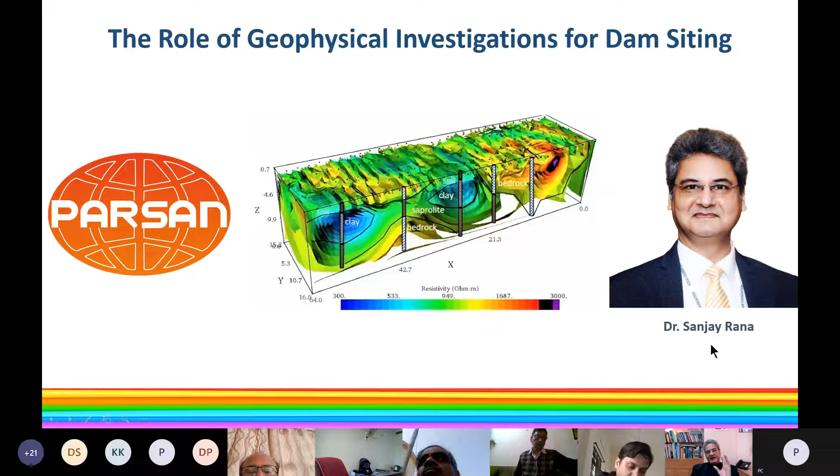As I said, I'll try to finish 15 minutes before the allotted time, so that we have at least 15 minutes for our discussions.

I represent the company PARSAN Overseas Private Limited, which is an ISO company. We are the largest engineering geophysics company in the country. But more than that, we are known for bringing new technologies into the country from time to time, starting from GPR in '96, and then shear wave refraction in '97, and the list goes on. So our emphasis is to bring the latest and cutting edge technology into the country, so that it can be used for various purposes in India.

We are an Indian multinational, so we have offices in India, which is in Delhi, Kolkata, and Bhopal, and we have 2 offices abroad, one in Bahrain and other in Saudi Arabia, and we are working in 18 countries around the world.

Various prestigious projects which we have completed: 76 hydroelectric power project sites were investigated by us from 2001 to 2002, under the 50,000 megawatt project of CEA. Lower Subansiri was done by us, and so many hydropower projects which we have done over the period of time. I have already been introduced very liberally, so I'll not go into my introduction anymore.

Except for the fact that some time back, I also came up with a guideline on geophysical investigation of dams, which was actually dealing with how existing dams should be investigated, other than dam siting. But this particular presentation, I'm going to keep to dam siting only. Geophysics is used extensively also for investigating existing dams, but that, of course, is a topic for some other presentation.

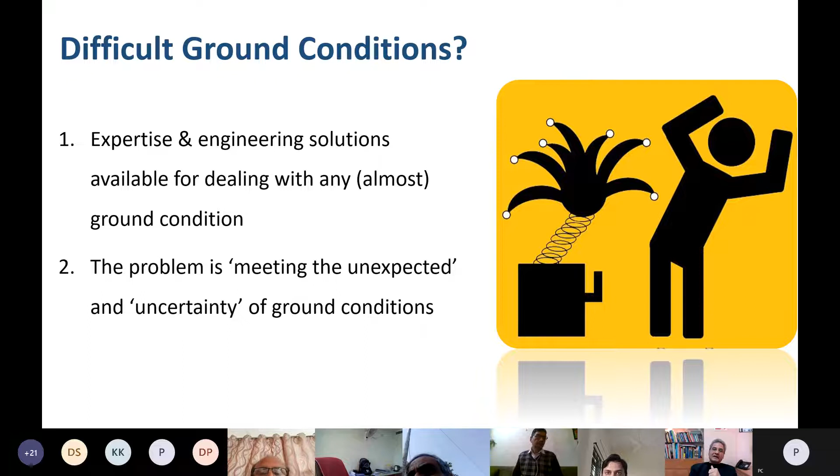For example, there is a shear zone, a fracture zone, a weak ground. There are so many ground improvement techniques which can be applied to take care of such issues. The problem is meeting the unexpected, that is, we don't know what exactly we might come across as we go through our construction process, and that's where the problem is. So meeting the unexpected and uncertainty of ground condition is the problem, and that's where geophysical investigation comes into the picture.

So what is geophysics? Just for people who have not come across geophysics, I'd like to start with this particular slide. This is common to practically all the presentations I make in this field for non-geophysicists, because it's the quickest and fastest way to explain what we are doing.

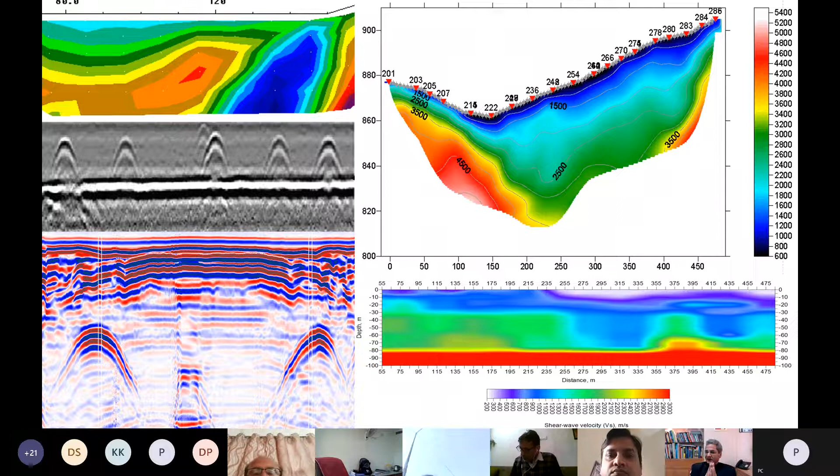Now, these are images of existing dams. As I said, we can use these methods for existing dams also. For example, this is a concrete dam, and here seismic tomography has been done to find fracture zones between the downstream and upstream wall. This is a masonry dam, very much from India. I don't name the dams, but again, upstream and downstream side, this section has been done, and we've been able to find out where exactly the bad zone is.

This is a velocity scale. You can see the velocity in this area is much lower than in the remaining area of the dam. Similarly, this is another dam, a complete L section, around 470 meters long. This has been done from the dam top to the dam gallery. Once we do it, we know exactly where the bad zones are. These green ones are the low velocity zones, so these are the bad zones.

This entire investigation took 2 days of time. This one takes around half a day. So this is the speed, because again, it's like X-ray, it's like MRI - fast, quick, and non-invasive.

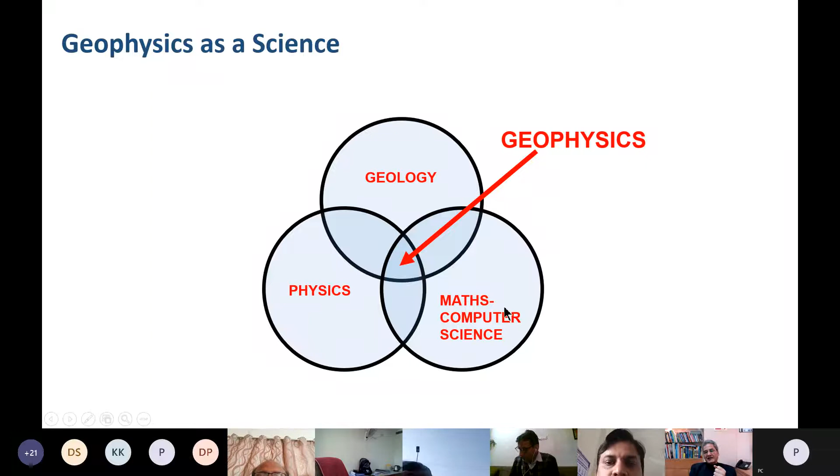Geophysics as a science falls at the intersection of geology, physics, and maths or computer science. So this is where geophysics falls.

Why use geophysics? The simple answer, again coming from the medical imaging example, is why go for X-ray, ultrasound, and MRI? Why not directly go to a doctor and ask him to cut open your body to check where the problem is? Because you don't want destructive investigations unless you know exactly where they should be done. So low cost, just like an X-ray is much cheaper than surgery, geophysical investigations are much cheaper than other investigations. Rapid coverage - with airborne geophysics, you can actually cover thousands of kilometers in a single day.

Use of geophysics does not mean that you do not use boreholes or logging of your holes. Boreholes are important to determine certain properties which only can come from laboratory investigations. But the idea is optimization of holes. So if you do a good geophysical campaign, instead of doing 100 holes, you can end up doing maybe 5 or 7, and still your information can be multiplied by 100. That is the whole idea, because it gives continuous information, minimizes surprises, and is good for early stage application, better planning, and smooth execution.

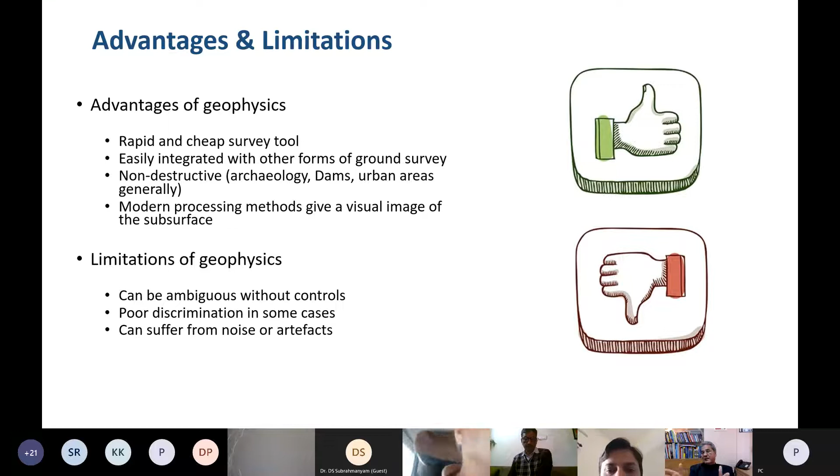There are limitations, of course. It can be ambiguous without controls. For example, if you are just doing one geophysical method and trying to interpret everything out of it, there can be ambiguity, there can be non-uniqueness. In few cases, resolution can be poor, discrimination can be poor, and there can be noise, there can be artifacts. That's where the experience of the practitioner comes into picture. The design of the survey comes into picture, so that you are not depending only on one method, but having a couple of methods in your toolkit to achieve what you want.

Various methods are there: seismic methods which measure elastic wave velocity, GPR which measures EM pulse velocity, electromagnetic and DC resistivity measuring resistivity, EM conductivity measuring electrical AC conductivity, magnetic method measuring the magnetic field strength created by subsurface anomalies, and gravity method measuring gravity field strength which is directly related to the density of the material. So depending on what exactly is your objective, a method has to be chosen.

Choice of the method is so critical that a wrongly designed geophysical program can result in complete failure, and that has happened in many projects. Over my last 32 years of practice, I have come across various clients talking about how they got some investigation done but did not get the desired results. More often than not, it boils down to 90% wrong choice of method, and the remaining 10% is about the inefficiency of the geophysicist doing the job, but mostly it is about the wrong choice of method.

Return on investment is very high on geophysics because it gives you detailed investigation of sites, saving huge costs towards change plans and project delays when surprises crop up. No drilling, no digging, so vast information at a fraction of the cost of traditional methods, and it is an early stage application.

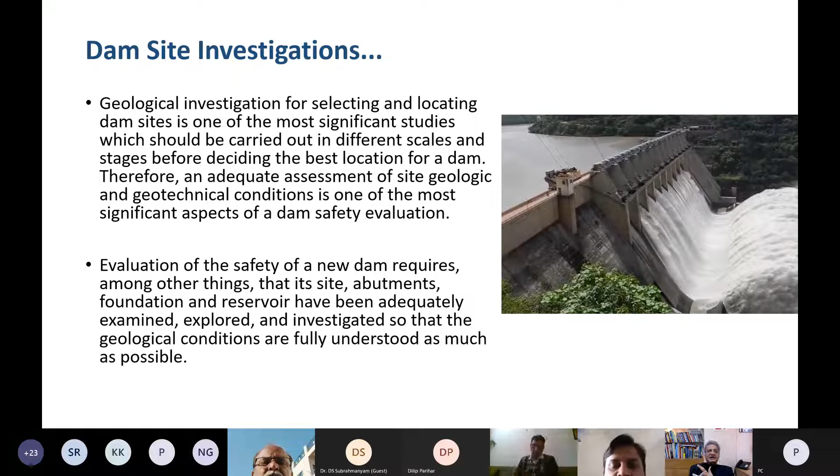So the first objective is the geology of the dam site, including the foundation for the dam itself and the sites for other structures such as spillway, diversion tunnels, and outlet works. Geology of all these components is very, very important to study, to check whether the dam foundation has sufficient strength and durability to support the type of dam proposed, and whether the foundation is watertight, especially when calcified rocks occur at the site and in deeper horizons below the foundations.

Second objective: the geology of the area to be occupied by the reservoir once the dam is completed. Whether the storage area is watertight, or whether there are areas of cavernous limestone or gypsum which might lead to the dam not retaining water. There are many projects where a dam has been constructed, but at the end of it the dam doesn't retain any water, because the reservoir area is not watertight — it is allowing the water to seep through.

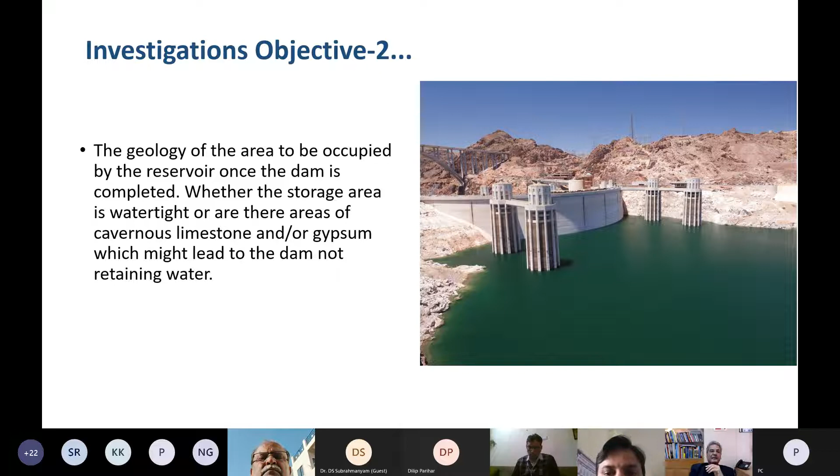Then, stability of the slopes of the dam site, the third objective. So stability of the slopes in the dam site and reservoir area, whether landslides into the reservoirs are possible, which might cause a wave of water to be pushed over the top of the dam. There have been many dam failures where a huge landslide has basically created a wave which has overtopped the dam. So these kinds of slope stability studies are important.

Then, finding the source of construction material needed to build a dam in areas nearby the dam site, including all required types like aggregates of different types and sizes, and filling material in the core and both surfaces. So finding the construction material is another objective, which again can be fulfilled by geophysical investigation.

So all these objectives I have talked about — if we start with good planning and do good geophysical investigations, followed by optimized drilling, you can cut hugely on the amount of time and money spent on investigation, and improve hugely on the amount of information you're obtaining out of it.

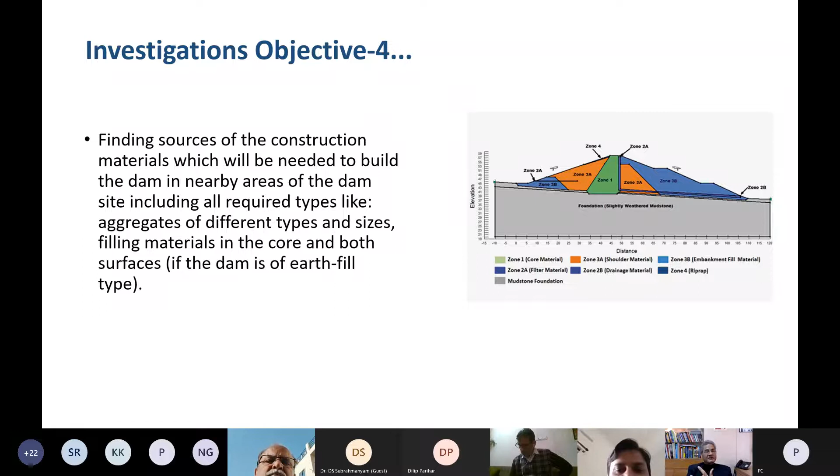So, necessary investigation steps, from beginning to end: study available geological maps, geological mapping, geophysical investigations, drilling, ideally with geophysical logging, then slope stability analysis, hydrogeological studies, seismicity studies, and borrow area studies. So these are all part of investigations for a new dam site.

When we talk about geophysical investigations, there are different types of geophysical studies which should be performed at the dam site and reservoir area to indicate the groundwater level, mechanical properties of the rocks, and the depth of the weathering zone; to detect faults, fractures, shear zones, weak zones in areas of interest; to investigate borrow areas; to conduct slope stability studies; and to determine shear wave velocity for seismic hazard studies. All these geophysics studies should be carried out on a new dam site.

Today in this presentation, I'm going to cover a few of these methods, maybe two or three. It's a very detailed subject. The idea is just to leave the message here that when you are starting study of a new site, to be used for something as important as a dam, it is good to be thorough. And when you want to be thorough, it has to start in a sequence.

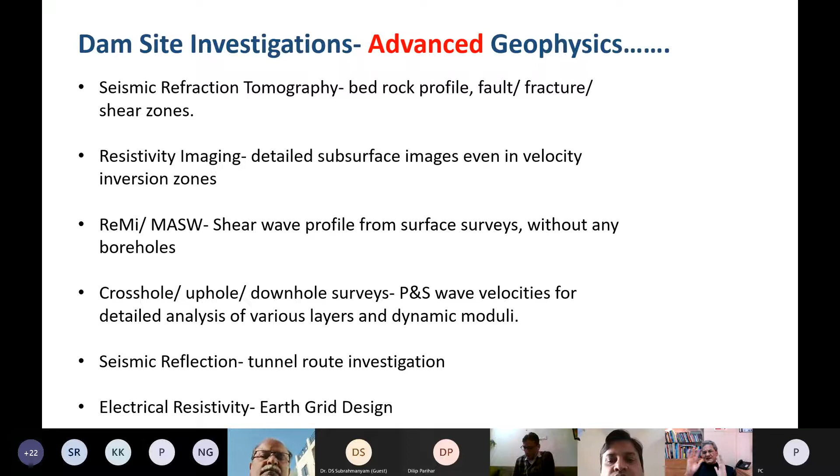Seismic reflection — if you're taking a tunnel, for example, for tunnel route investigation, seismic reflection is very useful. And for powerhouse areas, electrical resistivity helps in earth grid design. So these are various methods which are useful for dam site investigation.

I'll start with seismic refraction tomography. This is one of the most used methods for most site investigations. I still always maintain that you should, without fail, add another method along with this. Never use any method in isolation — that's the message I always try to give to dam owners. And there are big examples from around the world.

I will not name any dam, but one particular site in Bhutan had a seismic refraction study done by a company from Japan — experienced guys. They did seismic refraction, and based on the P wave velocities they gave the depth of bedrock. Drilling was also done, samples were taken, bedrock was confirmed, and excavation started. At that time it was realized that where they had reported bedrock at, say, 40 meters, bedrock was not even encountered up to 70 meters. The thick boulder layer was misinterpreted as rock based on P wave velocity. That is the danger of using a single method.

At the same site, if you also use refraction microtremor or anything which gives you shear wave velocity, you would have easily differentiated between the boulder layer and the rock. That's why, as I'm showing seismic refraction tomography, I'm also telling you the limitations of using a single method. But otherwise, it's a very strong method which is used frequently for dam investigation.

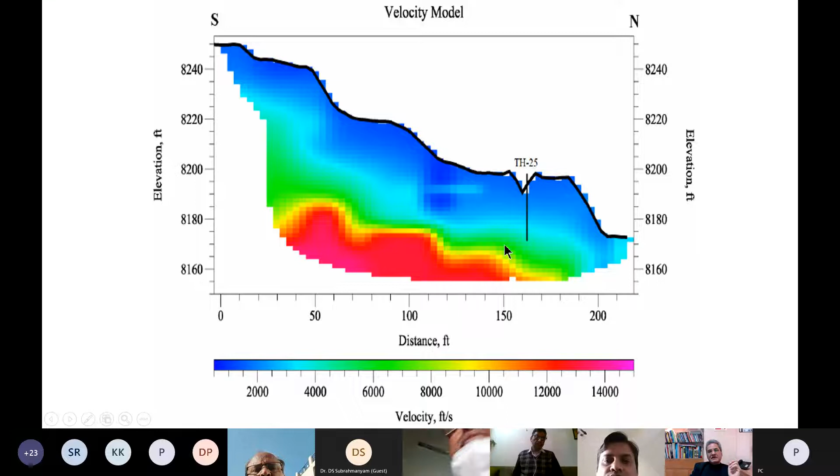These are various examples where borehole correlation has also been done. So this is overburden, you can see this is weathered rock, and this is the rock profile here.

Various such examples. What has changed over the years is that earlier we were doing seismic refraction presenting layer-based models - layer 1, layer 2, layer 3 - assuming that seismic velocity within a layer remains constant. That's not geologically true; the seismic velocity changes even within a layer. Seismic tomography has given us much better control over the way we look at the results, and we're able to interpret them better.

So this, for example, is the result of a typical layer-based model, showing bedrock here, but now you see the rock actually going down like this. So you're able to see with much more clarity how the rock is changing - this is distance and depth.

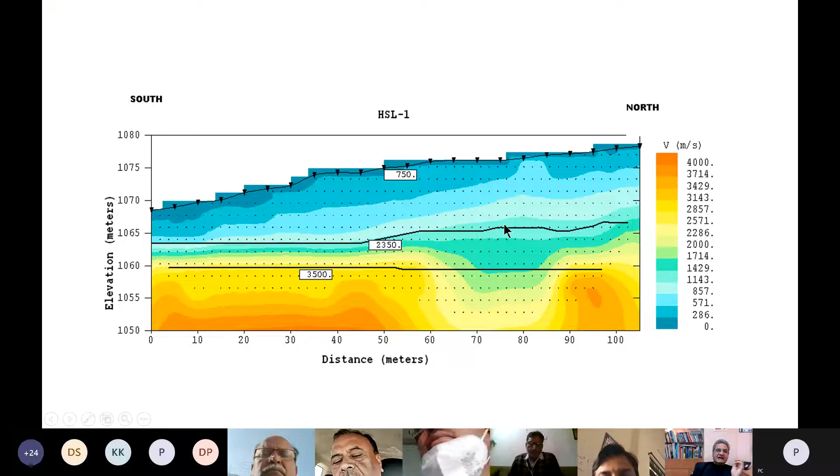This is a 105 meter long profile, and the time it takes to do this profile is around 1.5 hours. The time it takes to process this data is another 2 to 3 hours. So that is the speed of investigation, and this is the continuity of information - practically every inch has information available.

Now look at this example - there is a small shear zone here, hardly 7 to 10 meters. What are the chances that you're actually going to detect this shear zone through a normal drilling campaign?

1 in 1,000 or 1 in a million maybe. Once you do a geophysical investigation, you're able to see that okay, this is my rock, but this is where a shear zone is there, and now you can cater for it in your design. You can look for ways not to get affected by it when you actually start your construction.

This is the interpretation. So once you have done the entire thing, you can see weathered bedrock. This is how the weathered bedrock is, this is the overburden, and this is your very hard bedrock. And here you can see the topography of the entire thing is clear.

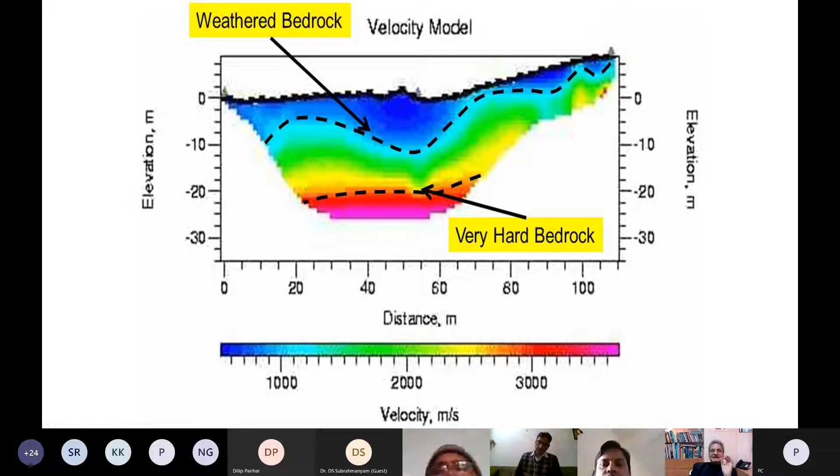It's not that you do a drill hole here and a drill hole here and then connect it like this. That kind of interpolation or extrapolation always leads to error. What you need in such sensitive areas is continuous information. So you get this kind of continuous information, and that's the beauty of these methods.

So what you get by seismic refraction is bedrock profile, rock quality and depth, thickness of overburden, fractures and weak zones, and it's used for slope stability studies also. So this is one of the methods which is very, very potent to investigate your dam sites.

Next method is electrical resistivity imaging. We also call it electrical resistivity tomography. Tomo is a slice, graphy is to write, so tomography is to write a slice. Whenever we are writing a slice of the earth, we call it tomography. So this is electrical resistivity imaging or electrical resistivity tomography.

Here what we do is based on a very old method of resistivity. Resistivity method says that if you pump current using two electrodes and measure potential using two other electrodes, then by Ohm's law you can find the resistance. You are able to find out the resistance R equals V upon I. V equals IR, that's Ohm's law. Now the same concept of the resistivity survey has been used in resistivity imaging, where we

put a number of electrodes together. So these days, for example, I have the system. I started using the 48 electrode system. I actually made my own at one time from my seismic refraction cable. At that time electrical resistivity imaging systems were not commercially available, so I created my own with a switch box and all that. That's long back in '96.

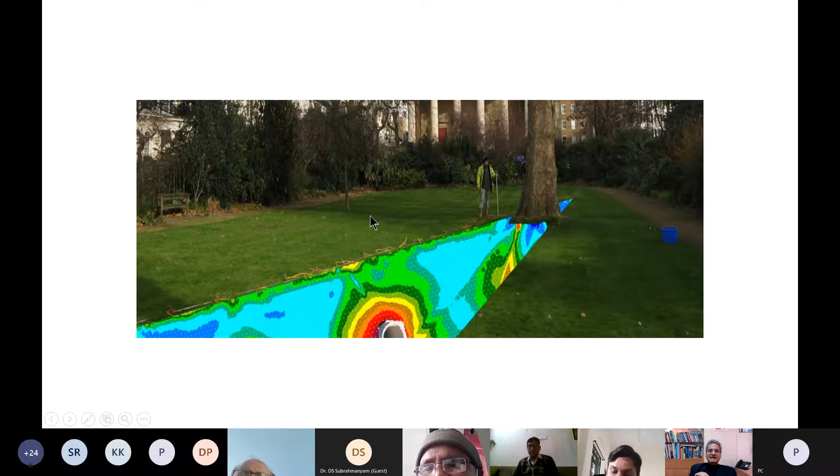Okay, so once you do this, for example, this is a rock. Again, the rock has very, very high resistivity, so you will see high resistivity. Here are the tree roots, so you have low resistivity. Like this, you have a 2D resistivity section of the subsurface. This is how you put it. All these electrodes in the ground are connected by a multi-core cable, and this is the kind of image ultimately which you get.

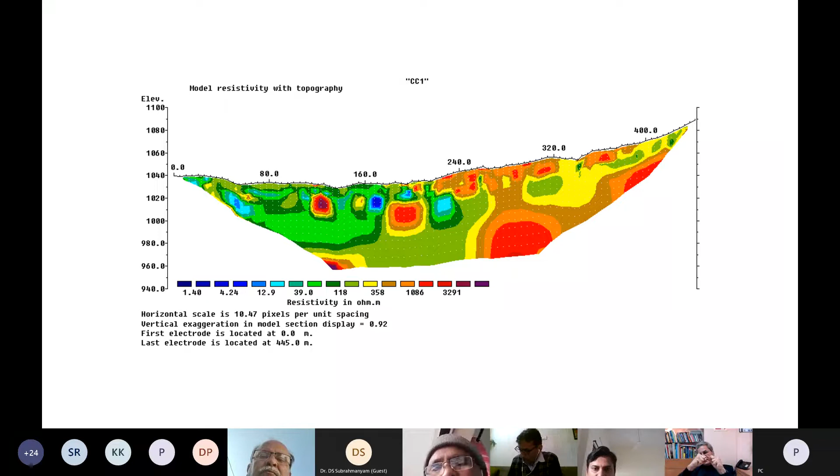This is another example from Lahaul Spiti Valley, where we did not have, by that time, these kind of resistivity meters with 120 electrodes and all that. The client wanted information up to around 500 meters deep. We made our own system of deriving information up to 450 meters.

They had done a number of drillings in this area. They were still not sure of the topography of bedrock, because as you can see, it is changing very quickly from one place to the other. So we did this investigation up to almost a depth of 400 to 500 meters.

Now this is a wonderful example. This again comes from a project we did in Himachal, or it was in Lahaul Spiti Valley, I forget. It's a very old project. Seismic refraction was done here, and as you can see, this is all bedrock.

Seismic refraction works on the principle of Snell's law: sin I upon sin R equals V1 upon V2. If V2 is greater than V1, then R is greater than I, and critical refraction can only happen when the velocity of the lower layer is higher than the velocity of the upper layer. If a low velocity zone is under a high velocity zone, seismic refraction will not detect it.

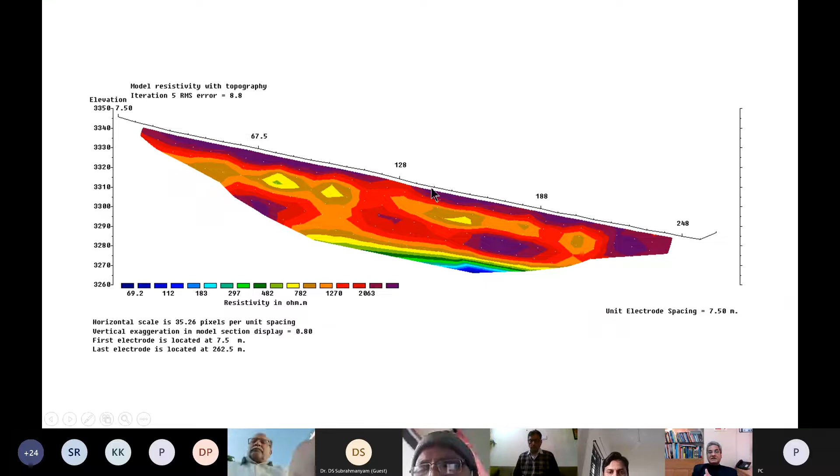That is why I said we always advocate combining methods. So in this case also, the methods were combined. We did refraction and we also did ERI. In the ERI data, a zone under the rock, possibly due to tectonic activity or folding, was detected using electrical resistivity imaging. This is a very strong case for why methods should be combined to do a thorough investigation.

It is also used for tunnel route studies. So this is a tunnel route, and here is a low resistivity zone, which was further investigated by drilling. This is basically a fracture, a fault zone. Here again, the weak zone is located here.

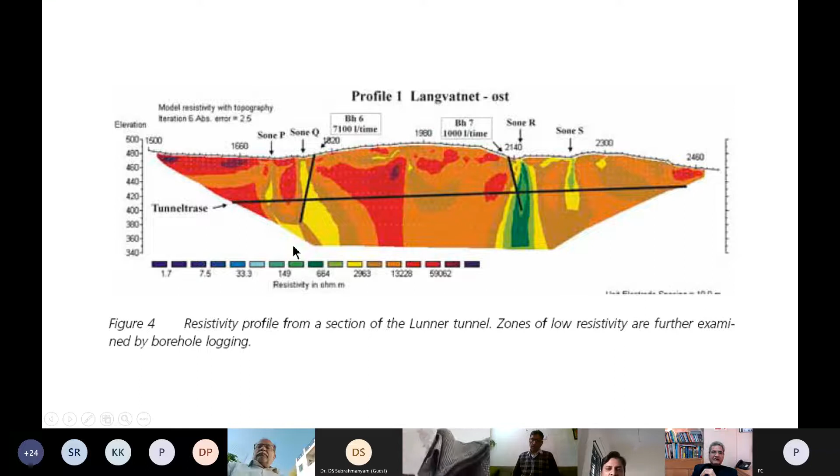The best part is that we have now mastered doing all these methods across flowing rivers. So when you are finalizing your dam axis, it is always a good idea to do a good geophysical investigation.

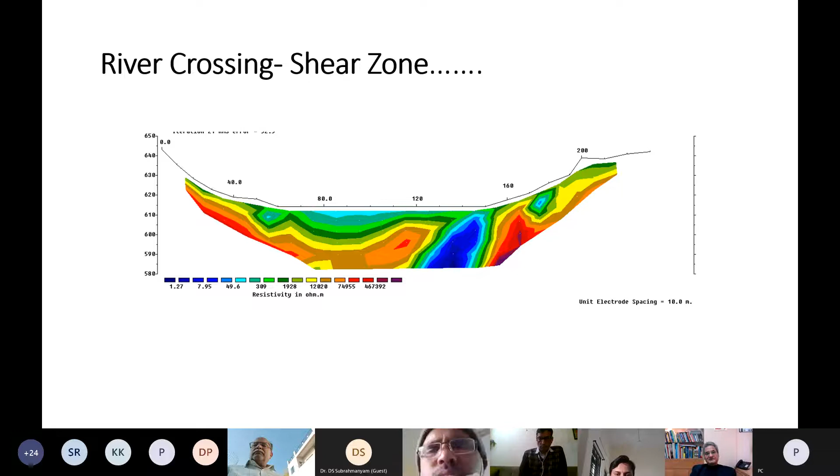All right, so these are various examples I wanted to show you. The next method I'm going to talk about is ReMi refraction microtremor, or MASW.

In many cases, we want to find out the shear wave velocity. Those involved in design already know that for earthquake hazard response, vibration response, or liquefaction analysis, you need shear wave velocity. REMI or MASW gives a very quick way of finding it out, based on dispersion of Rayleigh waves, and once you do this, you are able to see very clearly.

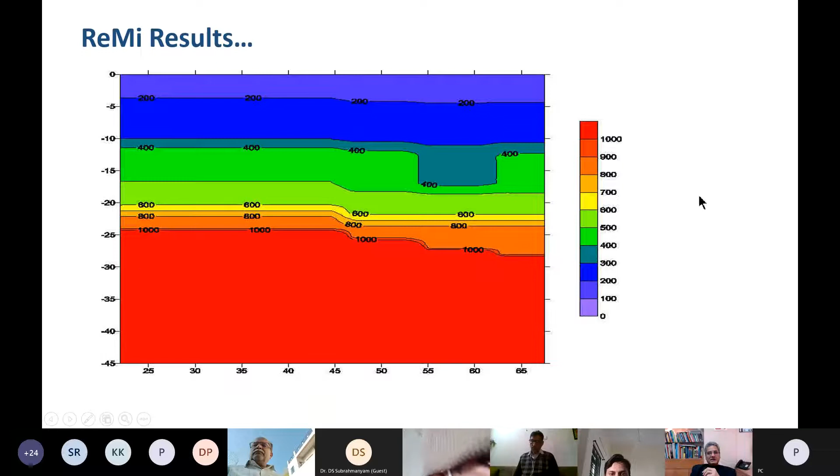This is another example of REMI, where this is only 45 meters, but you're able to see various blocks of anomalies. Now, this is a combination with a GPR profile. GPR is another method I'm not covering in this presentation because it becomes too lengthy with too many methods, but GPR works on the principle of EM reflection. So for high resolution shallow studies, GPR is the method to go for.

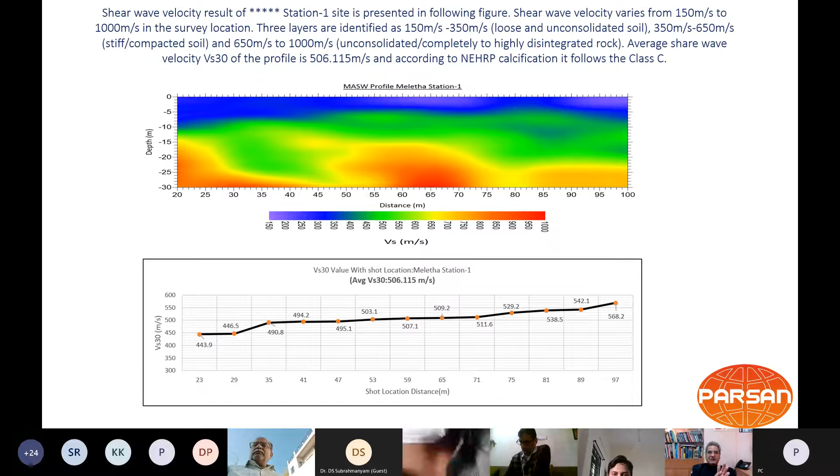Again here, the example of MASW, for these 30 meters. If you are going up to 30, 35, 40 meters, MASW is something we use. When we go more than 30, 40 meters, we have to go for passive source, so either you can use passive MASW or REMI, refraction microtremor.

The next method I'm going to talk about quickly is seismic tomography, again a very interesting method. Once you want to investigate a subsurface in great detail, you can have two boreholes, and in between the two boreholes you can conduct seismic tomography. In this, we are sending rays from one to the other, and the crisscrossing of these ray paths is being done.

Once we do the inversion of this entire thing, we are able to find out in great detail what is happening between the two boreholes. No interpolation is required. You know exactly what is happening between the two boreholes.

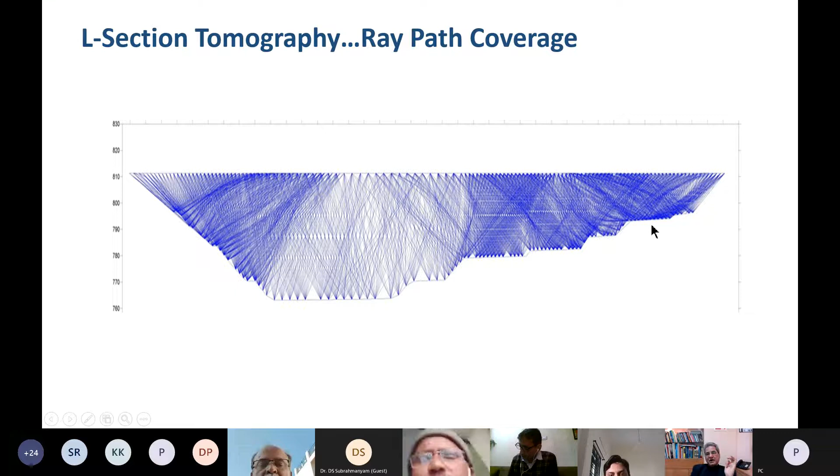This is an example of an existing dam. This is the L section, so dam top, and this is the gallery. Once you do the inversion, you see what's happening between the two faces. This is the example I had shown earlier, so you know exactly where your weak zones are. Again, dam upstream and downstream, with crisscrossing of the ray paths. Once you do the inversion, you know exactly where the bad zone is.

So now, once you're going for treatment, you don't need to plan from top to bottom. You know exactly where the bad zone is, so you can only treat that.

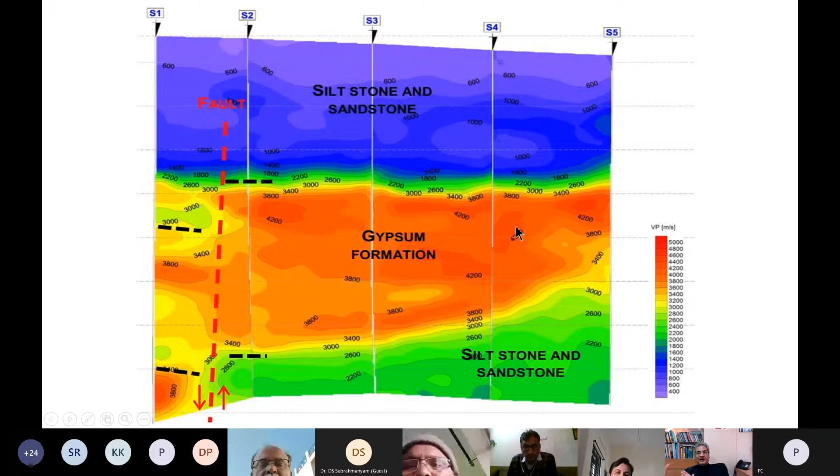If you do it for a new site investigation, for example with boreholes S1, S2, S3, S4, S5, tomography has been done between the boreholes. Now you are able to find exactly how different formations are going from one place to the other, and more importantly, detect features like this fault. This fault will not be detected just by drilling, but once you do tomography, you are able to detect it. So if you are having a drilling campaign, include seismic tomography in the drilling campaign and you can get much better results. With various boreholes, seismic tomography now gives you a continuous picture.

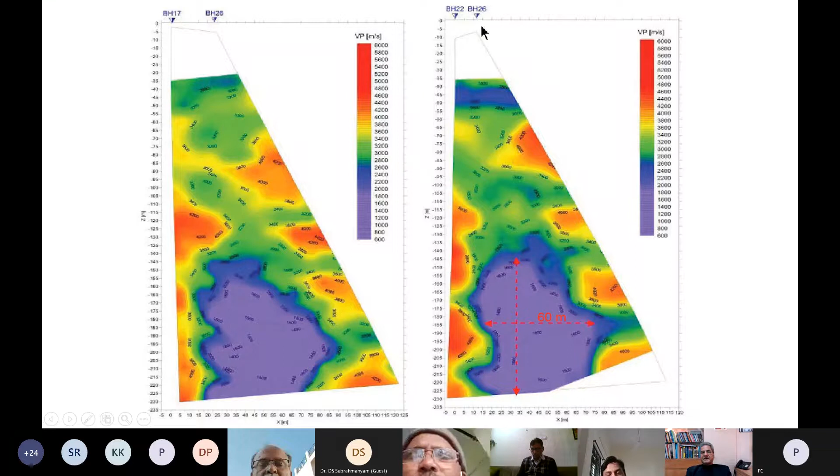No interpolation is required. These are examples of cavity detection using tomography, on 250 meter deep boreholes, where cavities were detected. Distance between boreholes here was as high as 110 meters, and this cavity was as high as 85 by 60 meters. These were inclined boreholes because the platform available for drilling was very small, and this cavity was mapped using seismic tomography.

There are various other applicable methods like seismic reflection, GPR, gravity and microgravity. I'm not able to cover these methods now, but the message is that various methods exist to give you insight into the subsurface.

To conclude with where I started, why use geophysics? Low cost, rapid coverage, continuous information, optimization of drill holes, minimization of surprises, and it's always good for early stage application for better planning and smooth execution.

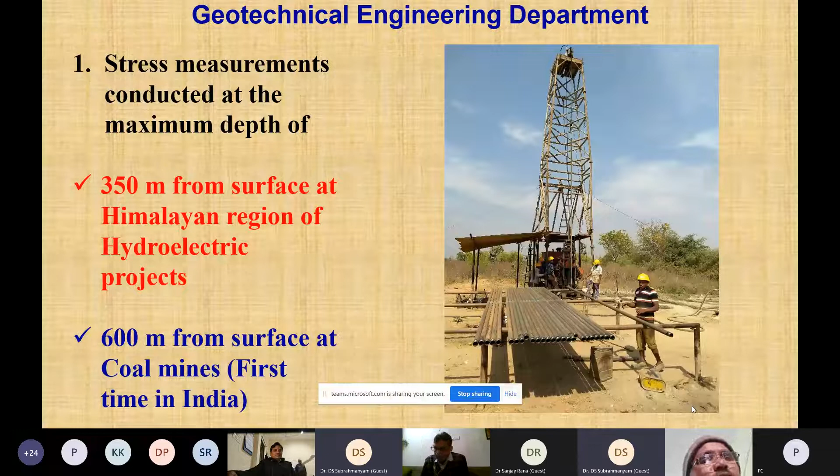Now my topic is state of ground stress, its use and measurement in rock engineering. So I'm going to talk first about in situ stress. What is in situ stress? Why is it called stress? Actually, there are 2 types of stresses in nature: one is physical stress and another is mental stress.

Physical stress is applicable for movable and immovable things, living and non-living things, but mental stress is applicable only to human beings. These 2 stresses have to be released as much as possible; otherwise, there will be instability.

As far as physical stress is concerned, Earth itself is having some stress. Consequently, all naturally formed formations like mountains, landscapes, and everything have some stress. Since we are mainly concerned with rock masses in the present context, stress may be defined, in general, as force per unit area.

Rock masses are initially stressed in their natural state. Whether one is interested in the formation of geological structures like folds, faults, or intrusions, or the stability of artificial structures like tunnels, caverns, etc., stress is the most important factor.

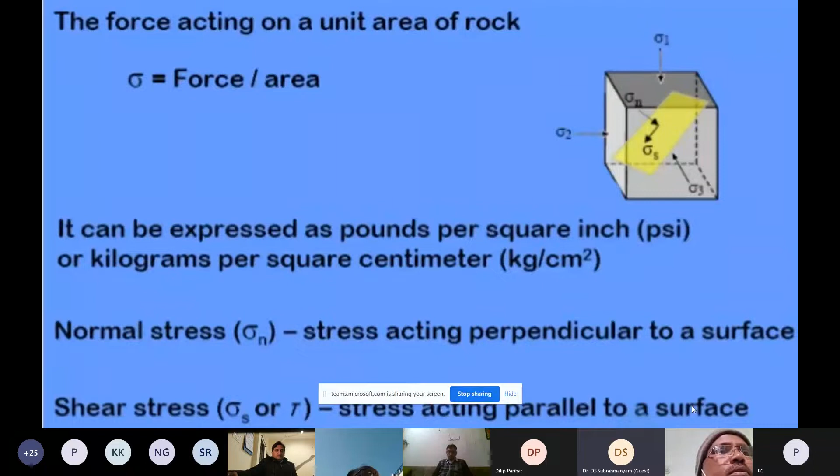Normal stress is stress acting perpendicular to the surface, and shear stress acts parallel to the surface. Actually, what is the origin of the stress?

If we go into the history, previously people used to think that the weight of the overlying rock mass was recognized, for more than a century, as the primary source of stress around underground openings. He postulated what is called hydrostatic stress, meaning like water, which has uniform stress in all directions. This is called hydrostatic stress, similar to the stress state in liquids.

This theory was later modified by him into the lithostatic stress field theory, which assumes the rocks in the crust are in an isotropic state, meaning sigma maximum principal stress, minimum principal stress, and vertical stress are all the same and equal. For many years, the design of underground excavations was based predominantly on this concept.

But the lithostatic stress field theory was later replaced by the uniaxial strain model by Terzaghi.

This is in the year 1952, I think. This concept suggests that because rocks are confined at depth, the horizontal expansion is restricted by adjacent rocks, so that ideally the principal strains become zero, thus making the horizontal stress a function of the weight of the overburden and the Poisson's ratio.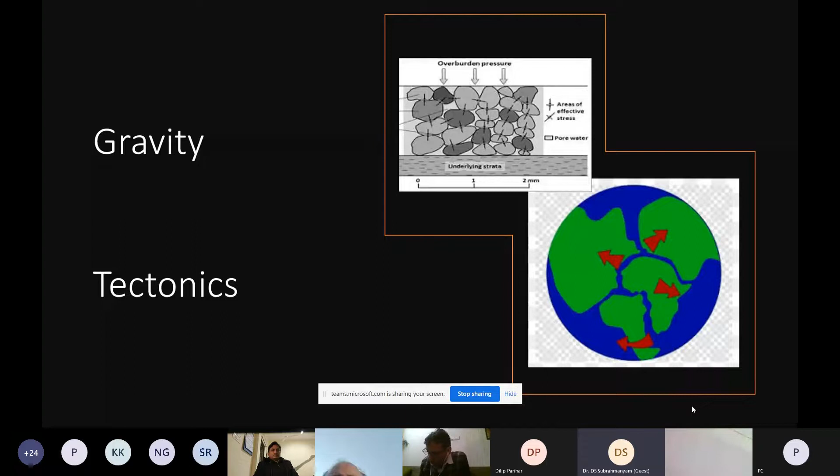So this is explained: whatever the case, there are two main factors for the formation of stress in the universe. Number one is gravity, and the other is tectonics. Gravity is nothing but vertical stress. Tectonics is always related to horizontal stress movements. These are the main important factors for the formation of stress in this universe.

So stress is fundamental to the principles and applications of rock mechanics. It is a tensor, a quantity with magnitude, direction, and the plane under consideration. An example of a tensor is stress. It is defined at a point and represented by a second order Cartesian tensor with 6 components.

And it is called continuum mechanics, where each and every particle in the body is continually distributed, not like discrete particles. It is a fictitious quantity that cannot be measured directly, so if you want to measure the stress, you have to disturb the rock. Otherwise, you can't measure it.

So the total stress field acting in a rock can be represented by 3 components, S1, S2, S3, or sigma capital H, sigma small h, or sigma v, at right angles to each other. It is common practice to consider that the ratio of the average horizontal stress to the vertical stress is denoted by K. K is the horizontal stress by vertical stress.

Based on K, many design parameters are formulated, and for cavern design and others, K is the most important factor. This vertical stress, maximum principal horizontal, vertical stress is always calculated.

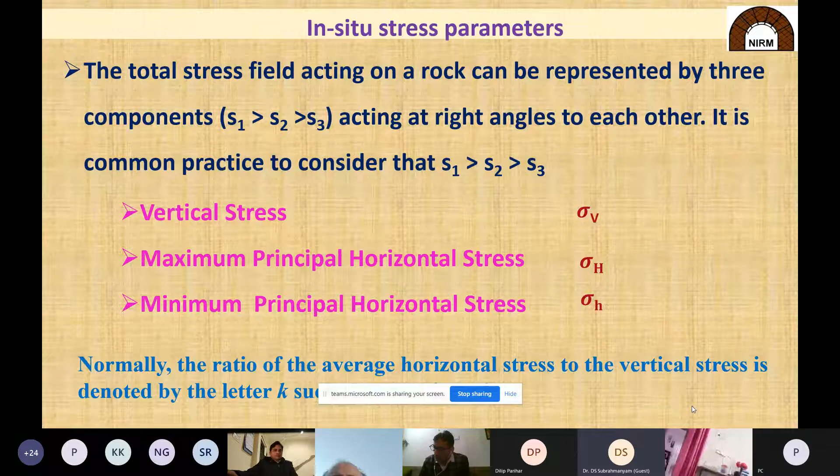In some cases, it is measured directly in some of the methods, which I will explain in later slides. Otherwise, vertical stress can be calculated as rho gh, density and rock cover and acceleration due to gravity. And maximum principal horizontal stress should be measured, and minimum principal horizontal stress also should be measured.

But if you want to have the stress data locally, that means to design any hydraulic project, powerhouse, or any cavern or structure, then you should not depend upon the focal mechanism data, and you have to concentrate on the local stress. That means in situ, directly you have to go to the field and measure the in situ stress.

So on a real or imaginary plane through a material, there can be normal forces and shear forces. These forces create the stress tensor. The normal and shear stress components are the normal and shear forces per unit area.

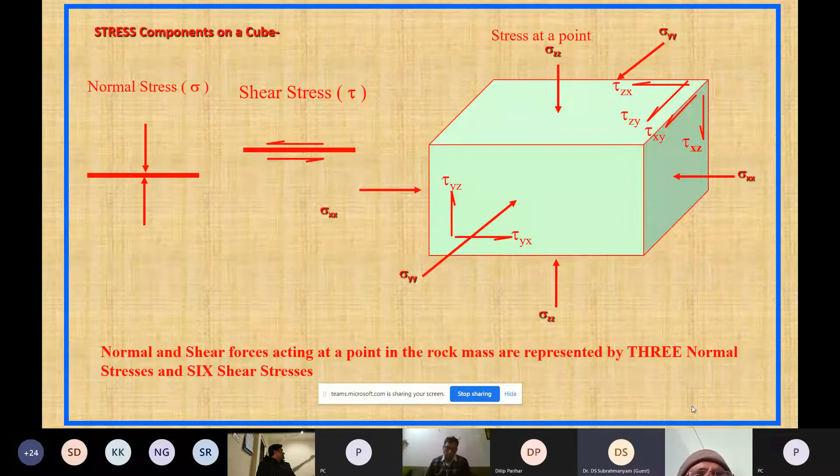If you see here, suppose a cube is there, there are 3 stresses acting vertically, horizontally, in 3 directions, and along with that, shear forces are also acting at a point in the rock mass, represented by 3 normal stresses and 6 shear stresses. So usually there are 9 stress components acting in 3 directions on 3 planes.

However, if the planes where the stresses act are rotated, there is a position where the magnitude of shear stresses becomes 0. It is a matrix, everybody can understand, I hope. Hence, the stresses acting on the 3 planes are only normal stresses. In this situation, the 3 normal stresses are termed principal stresses, that means vertical stress, maximum principal stress, and minimum principal stress.

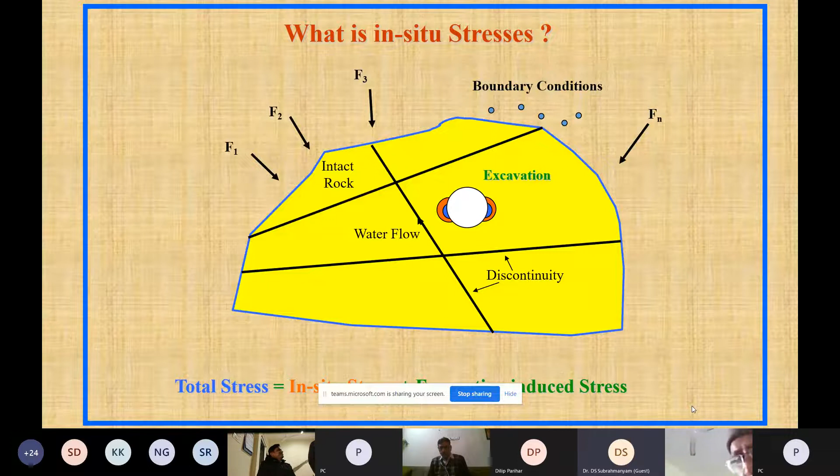So what does in situ stress mean? In situ means total stress. We have to take into consideration in situ boundary conditions, like intact rock, water flow, discontinuities near the excavation, and all boundary conditions. Then we measure total stress directly at the site — that is called in situ stress.

What are the types of stresses? There is confining stress, where stress is equal from all directions; tensional stress, meaning pulling apart; compressive stress, meaning pushing or compressing; and shear stress, which acts parallel to a surface and leads to change in shape. Stresses acting perpendicular to a plane squeeze rocks and may decrease volume, while tensional forces act away from a plane and pull the rock apart.

There are various types of in situ stress. Virgin stress is the natural state — the stress which exists prior to engineering. Induced stresses are the natural stress state as perturbed by engineering, such as mining activity, drilling, pumping, injection, applied load, swelling, etc. These are man-made and are called induced stresses.

Gravitational stress is the stress state caused by the weight of the overburden — this is the vertical stress I already mentioned. Tectonic stress is the stress state caused by tectonic plate movement, and remnant stress is the stress state caused by previous tectonic activity.

Terrestrial stress happens because of moon activity and includes seasonal temperature variation and moon pull. Residual stresses occur because of metamorphism, magma cooling, changes in pore pressure, etc.

Paleo stress is a previous natural state that is no longer existing — we can measure it through joints and fault planes, but it was active once and is no longer active. Near field stress is the stress state in the region of an engineering perturbation, while far field stress is the stress state beyond the near field.

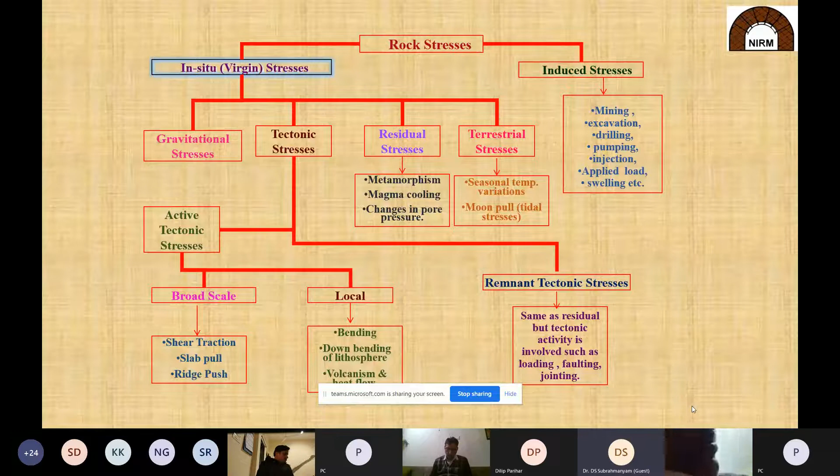Local stress is very important — it is the stress state in the region of interest where you want to construct a cavern or any structure.

So the study of stress is the study of rock behavior in the solid state under varying environmental and internal conditions. The main focus is how rocks respond to applied stresses or plate tectonic movement, to decipher plate tectonic movement, mantle convection, gravity, and isostatic movements, magma, and all. Academically, these stresses are very important to know.

In hydroelectric projects, underground mines, railway tunnels, irrigation projects, crude storage plants, nuclear plants, and other major areas, we have to go there and measure the stress for the construction of any cavern. I will explain in a later slide how we orient the caverns and everything.

In civil engineering, the stability of structures, orientation of tunnels, and design of caverns are very important based on stress design. In underground mines, stress is used for designing and orienting mine excavation geometries, and overall mine stability and layout. In the petroleum industry, knowledge of stress is important for fracturing formations to enhance oil and gas production. These in situ stress parameters are very much important.

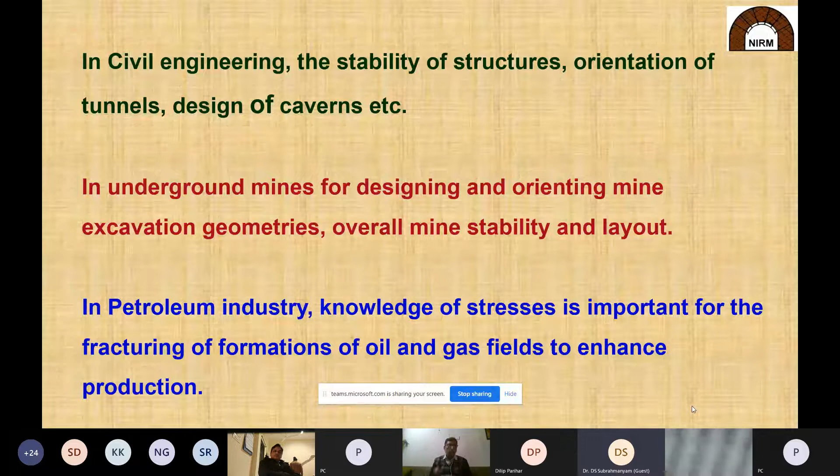So why study stress? There is a pre-existing stress state in the ground, which is a major contribution of the major geological phenomena of the earth. Knowledge of the state of stress can help in profitable exploitation of natural wealth and disaster management.

In civil and mining engineering, in-situ stresses control the distribution and magnitude of stresses around underground openings. This is because rock which previously contained stresses — now when you open a cavern or make a tunnel, you are again disturbing the rock.

That means it is having stress, and redistribution of the stresses will take place. So that is the reason knowledge of the present state of stress is required to understand the impact of stresses on excavations. Stress concentrations can create excessive deformation, ground subsidence, and failure of rock mass. This basic knowledge of the stress state can help us in the safe and optimum design of any excavations.

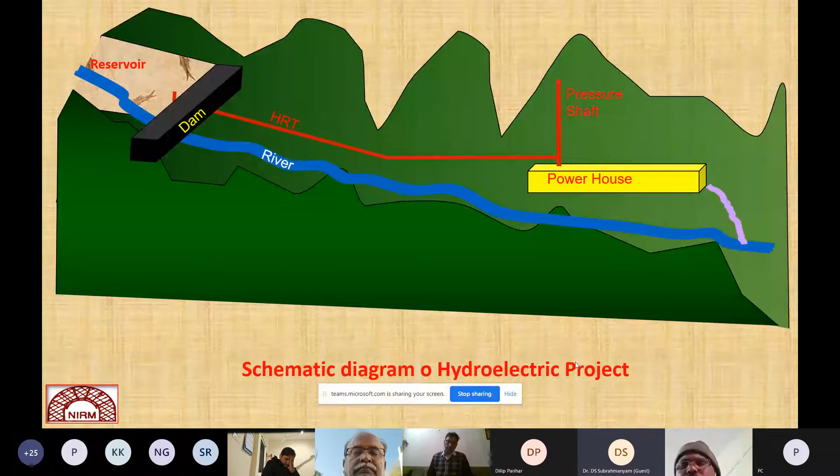So for transportation tunnels, whether circular or horseshoe shaped, it depends upon the stress direction and stress magnitude. If vertical stress is more, the span should be very less and the vertical roof should be high. If weak rock conditions are there, the circular tunnel is the best, otherwise there will be stress concentration where the floor and wall meet, with high horizontal stresses. So to avoid that, if you make the circular tunnel, it will be stable. So horseshoe shaped tunnel for good quality rock, and circular shape tunnel for poor quality rock.

And in irrigation projects, we have conducted almost 10 to 15 studies in Telangana state, in Pranahita, Chevella, Kaleswaram, and other underground irrigation packages. The pump house of the project is the main key; that pump house should be oriented along with the major principal stress direction, meaning the maximum principal stress direction orientation, the long axis should be aligned.

So in the mining industry, the knowledge of rock mechanics can be utilized since high horizontal values have a profound influence. Whether it is room and pillar mining or long wall mining, stresses in pillars affect the overall mine extraction ratio and control the overall mine stability and layout.

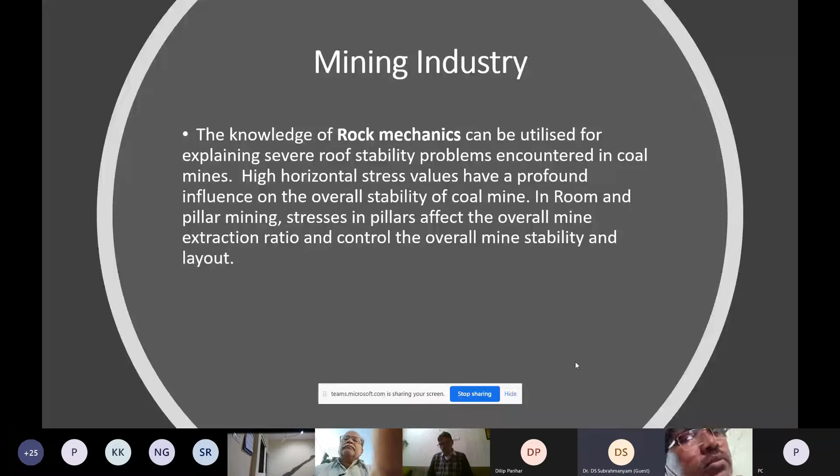Earlier people used to think that if vertical stress is more, the roof gets collapsed because of that. That is wrong. Suppose there is a balloon - if you press it vertically, it bulges in the horizontal direction. That means if vertical stress is more, there will be a problem in the walls.

If horizontal stress is more, suppose again like a balloon, if you press horizontally, it will bulge towards vertical direction. That means the roof will have some problem. This was recently, in the 1960s and 70s, discovered by extensive research. Because of vertical stress, the walls will have problems. Because of high horizontal stress, the roof will have problems. So how to avoid all these problems means we have to measure the in-situ stress.

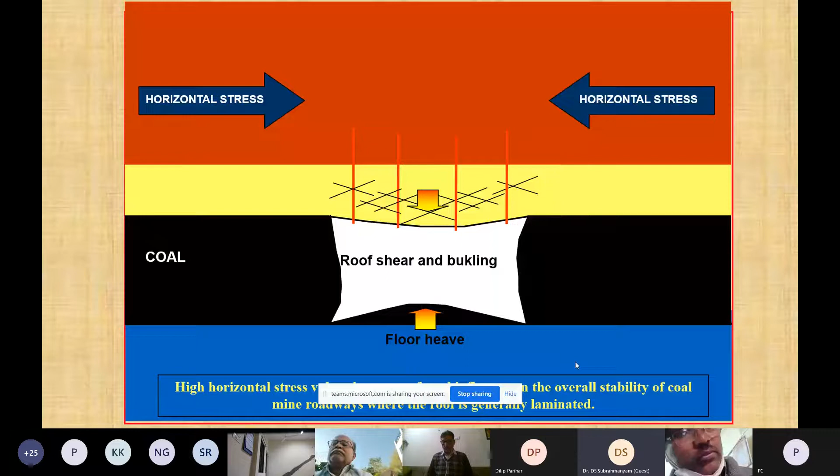So here you see horizontal stresses are more. That means roof shear and buckling is taking place. High horizontal stresses affect the overall stability of the coal mine roadways and haulage roads. Wherever you see these stresses, it is very important to avoid roof shear, buckling problems and floor heave problems.

So if mine roadways are oriented across the direction, what will happen? The major horizontal stress may cause severe roof falls, and stresses are found to be redistributed due to local tectonics and mine openings. I already told you rocks are initially stressed. If you open a mine, the stresses will be redistributed. And again, after opening, you have to measure the stress - what is the present level of stress, magnitude and direction.

According to that, you can't reorient everything in the underground mine - it is practically not feasible. But numerical analysis and so on will help us. At least we can orient mine roadways, haulage roads and everything to avoid some dangerous things - at least roof collapse and so on. So this will give the data on how to address the stress problems. So for rational design of mines, these in-situ stress parameters are very important.

So for crude storage in the petroleum industry, I already told you, for enhancing the production of oil, crude storage and these stress parameters are important. But in underground gas storage, the stress parameters play a vital role, because the minimum principal stress magnitude should be more than the liquid pressure or gas pressure. Otherwise, if it is less, the gases will escape. So that is the thumb rule - minimum principal stress should be more than the water pressure. Then only these gases will be stable.

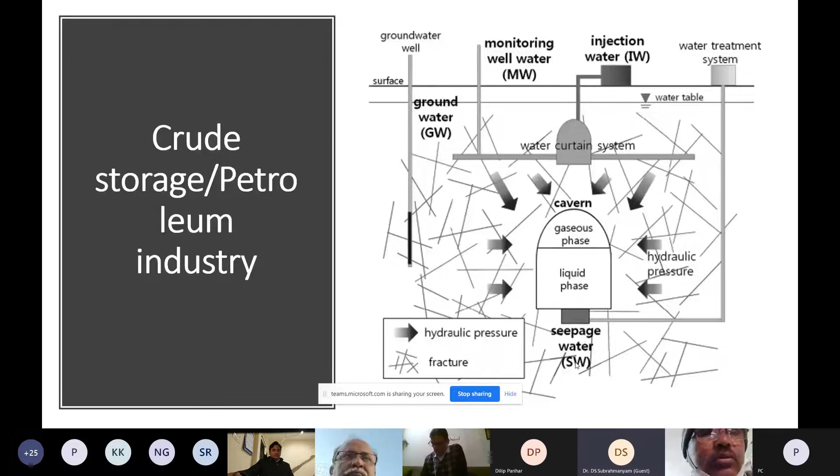So the principle behind oil and underground rock caverns essentially implies groundwater pressure for containing oil and gas within an unlined rock cavern - it can be lined or unlined. If unlined, the function of hydro-confinement is to provide artificial water recharge in the rock mass, in order to enhance water flow patterns and maintain groundwater pressure in the fissures above the storage cavern vicinity. So the water pressure should be high enough to prevent gas from leaking out from the cavern. How will we know? Because we have to measure the stress and find out the magnitude of the stress. Then only we can give the design.

So in nuclear repository sites, the storage sites - nowadays nuclear waste is being constructed here in Karnataka, Andhra, and many areas in Visakhapatnam and other areas to dispose of nuclear waste. For nuclear waste, these are very deep constructions, maybe 500 meters, 600 meters. So these caverns, the nuclear waste disposal areas, should be very safe - for at least 100 years, 200 years it should be safe. So for that, radioactive waste canisters will be oriented along the maximum principal horizontal stress direction only. The storage sites are always parallel to maximum principal stress, opposite to the placement rooms - you can place those parallel to the minimum principal stress direction.

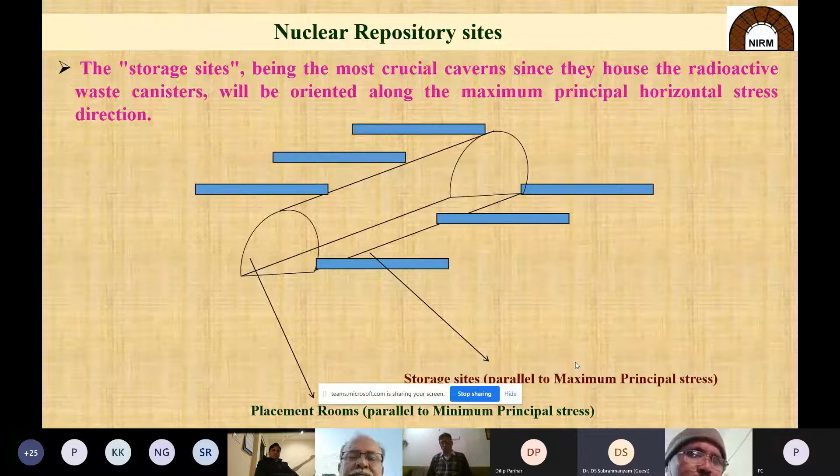So the major factors affecting ground stress are: effect of depth, effect of topography, effect of geological structures. So what is the effect of depth? The vertical stress always increases - if the rock cover is 100 meters, it is approximately 2.7 MPa. That means density of rock, acceleration due to gravity, and height of the overburden rock. Roughly for 100 meters it is 2.7 MPa, for 200 meters it is 5.4 MPa, and so on - it is calculated.

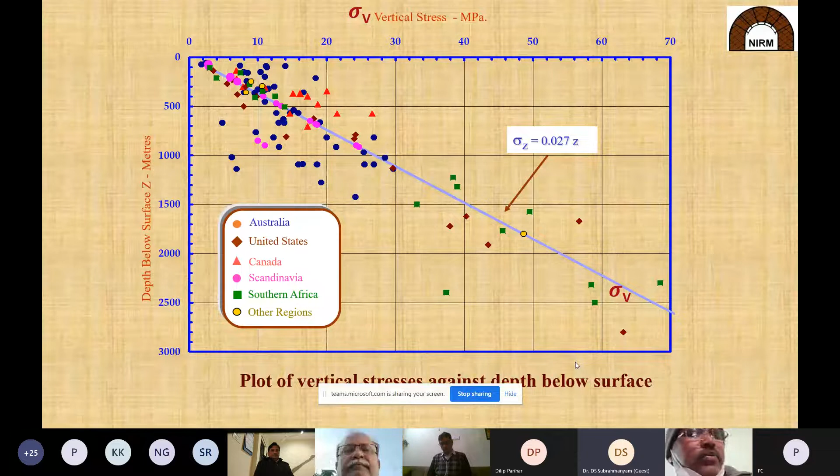This is calculated, but there is also an overcoring technique, which I will explain, where you can measure the vertical stress directly rather than just calculating it. So this vertical stress is always linear to the depth - as you go deeper and deeper, it follows the fraction 0.027Z, always increasing. So the average ratio of horizontal stress to vertical stress, K, is a very important factor for the design of any caverns. K is always 1 times, 2 times, 1.3, 1.5, 2 times, like that. Based on K only, we have to design the rock structures and underground caverns.

So how will topography affect stress measurements? Suppose if any topography is there and a river is there, on the river edge or in the valley side, if you want to construct a project, near horizontal ground the principal stress directions are always changing. If you measure principal stress in the valley portion of the area, the stress will automatically take the direction of the valley.

The influence of topography is always there. Whenever we go to a site, first we will see where to measure, then check whether any topography effect is there or not. If topography effect is there, we have to go away a little from the valley side and measure the virgin stress. If you measure near the valley portion, the stress will automatically take its direction. So the influence of topography on initial stresses is always there.

Beneath the valley, high horizontal stresses will be concentrated. This is the thumb rule: beneath the valley side, one principal stress is normal to the slope and equals zero, while the other two principal stresses lie in the plane of the slope. Beneath the sharp notch of a V-shaped valley, the induced stresses are always very high at the bottom of the valley.

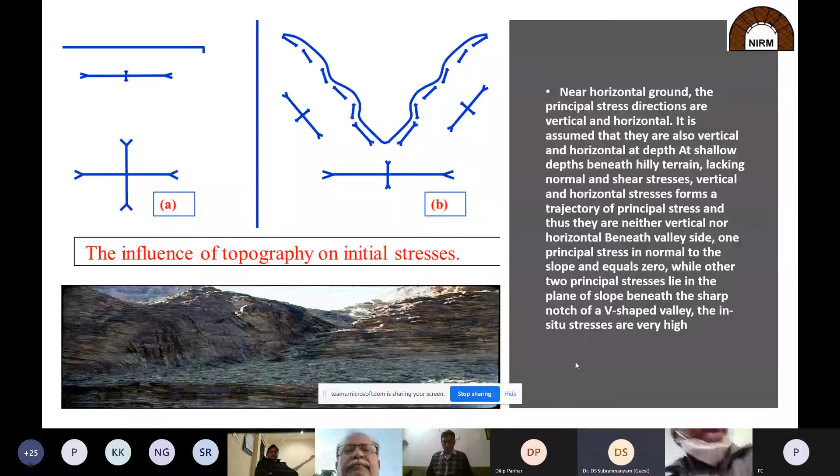We practically proved this - we measured it in one of the projects, Ropali Ghat hydroelectric project in Nepal, in a V-shaped valley, on both left bank and right bank. The V-shaped valley topography effect is clearly indicated - on the right bank it shows north 20 degrees, and on the left bank it is north 130 degrees, meaning it is taking the shape of the valley.

So this is a very important parameter while conducting any stress measurements - whether any topography effect is there or not - like that we have to examine.

So whether the tunnel should be steel lined - the minimum principal stress is also an important parameter to decide the most economical way. The minimum principal stress in the rock mass should not fall below the maximum dynamic water pressure in the tunnel. This is applicable for unlined tunnels like HRT, head-race tunnels, and other hydraulic projects.

The minimum principal stress should always be more than the water pressure in the tunnel - then only it will be stable, otherwise water leakages will be there. So this is the thumb rule - the minimum principal stress plays a vital role while designing unlined tunnels.

So this is the tunnel - we conducted this in one of the hydraulic projects in a valley in Himachal Pradesh. Away from the valley, we studied how the stress acts, and based on that we can suggest which section requires concrete lining or steel lining using the stress measurements. We measured on either side of the valley, a nala type valley, and gave the direction indicating which section requires steel lining and which section only requires concrete lining.

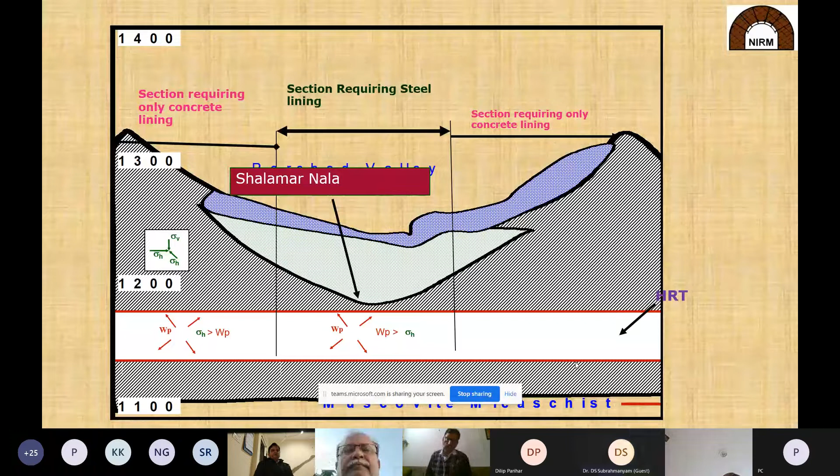In the same way, like at Kalakud and Kunnikud, in one of the hydraulic projects we measured how the proposed HRT should align, how the stresses play a role in deciding the orientation of the HRT. We measured there also, gave the parameters, and according to our parameters only they designed the HRT.

So as already explained, there are three types of stress regimes. Suppose if sigma V, the vertical stress, is more than the maximum principal horizontal stress, and the maximum principal horizontal stress is more than the minimum principal horizontal stress, then it is a normal fault regime. Wherever sigma V is more than sigma capital H, the maximum principal stress, it comes under normal fault regime.

Suppose it is a thrust fault regime - that means maximum principal stress is more than minimum and vertical stress, then it is called thrust fault regime. In strike-slip fault regime, the maximum principal stress is always greater than the vertical stress. Based on these principles, we can find out the regimes also.

According to regime, suppose some areas you can see in the ice hockey stadium in Norway. The vertical stress per 100 meters should be 2.7, but the rock cover is only 40 meters. They have constructed the ice hockey stadium below the rock surface with only 40 meters rock cover, but it is very stable. Why? That means the horizontal stress is more than the vertical stress. Vertical rock burden is very, very less, but it is stable because in cumulative geological history, there was a big rock overburden. Over time it has been eroded and washed away, but the rock still remembers that horizontal stress. So they noticed high horizontal stress, and they constructed the ice hockey stadium, and it is very stable.

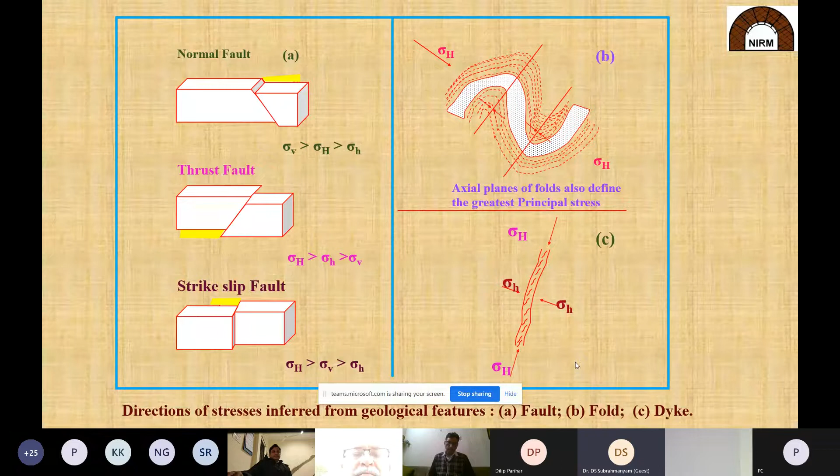Suppose tectonic force, horizontal compression force acting parallel to the surface of the earth, then folds will be formed. The greatest stress axis is always horizontal.

So in faults, it is very advisable, already advised, that whenever you make stress measurements, it should be away from the fault. Because if you measure the stress near the fault, due to redistribution the stress will give a different result. That is called perturbed stress. So if you want to know the true local stress, you have to keep the stress measurements away from the fault.

So we measured in one of the coal mines in Tesgora, Nagpur area, Parashia area. Near the fault, we measured sigma capital H as 11.2 MPa, and sigma small h as 5.6 MPa, with orientation north 30 degrees west.

But for an S&T project, we did a lot of research in this area, away from the fault, almost 200 to 300 meters away. There, sigma capital H gave 9 MPa, and the direction was surprisingly north 60 degrees west.

That means if near the fault, stress will always be perturbed, it will be redistributed. So whenever you want to measure the stress, you have to avoid fault areas. The testing site should be located away from the fault only.

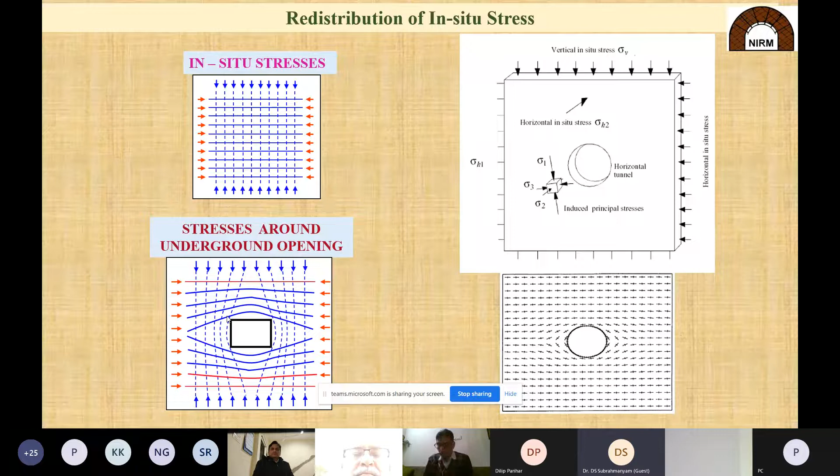Suppose somebody asks me to measure the stress in the exploratory drift, immediately I have to see what is the diameter of the tunnel, whether it is 3 meters or 5 meters. So 2.5 to 3 times away from the diameter of the tunnel, we have to measure the stress. Only then will it give the virgin stress, that means natural stress. Otherwise, the excavation effect will be there, and the stresses will be different - you will get induced stress, not in situ stress.

So what is the thumb rule? First of all, wherever there is a cavern, an underground powerhouse, or any underground structure, if you want to construct it, the orientation of the structure, the powerhouse, or any cavern, the long axis of the cavern should be oriented towards the maximum principal stress direction only. This is the thumb rule.

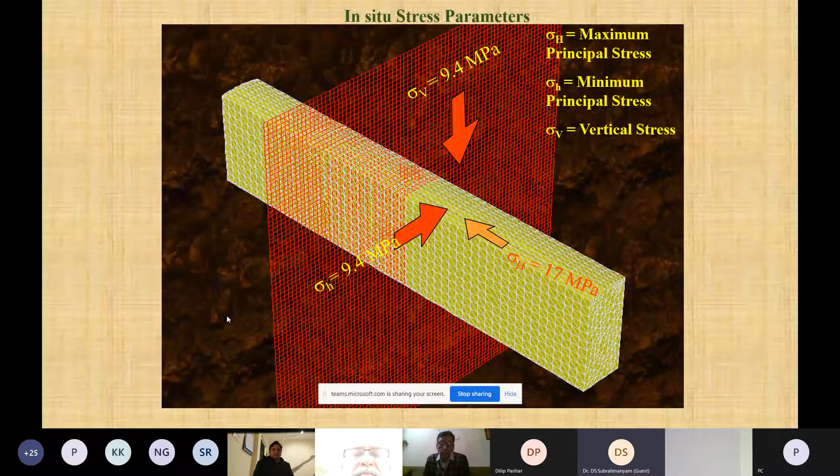Otherwise, if you look at the total displacement and deflection, any deviation from the correct orientation will show results like this. The distribution of stress in the surrounding rock mass and the deflection angle S max, after simulation, will look like this.

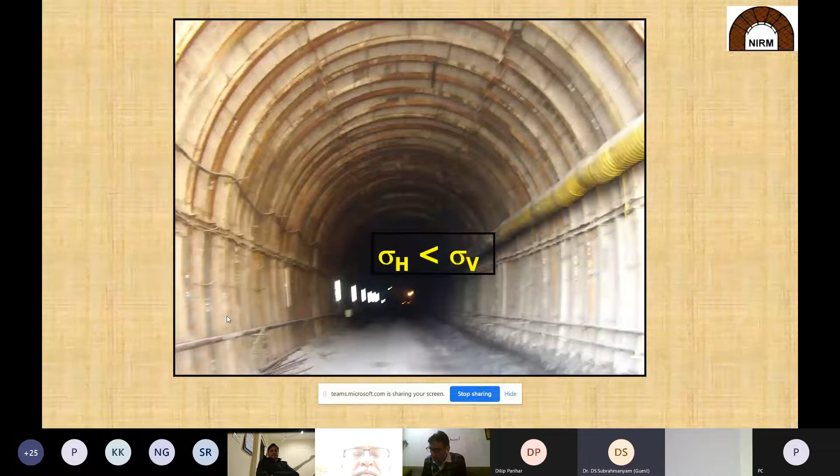The third thumb rule: if sigma capital H, the maximum principal stress, is less than sigma V, you can have a more sufficient span. That means if the maximum principal stress is more, the span can be more. If vertical stress is more, it should be constructed differently, meaning the height of the roof can be more if vertical stress is more than sigma capital H.

So any deviation in sigma capital H can cause collapse of the tunnel. We have seen photographs of some areas and advised them to orient the tunnel according to our direction, but due to small deviations and some problems, they could not do it. Afterwards, after 3 or 6 months, they called us again and we saw the problem they had encountered.

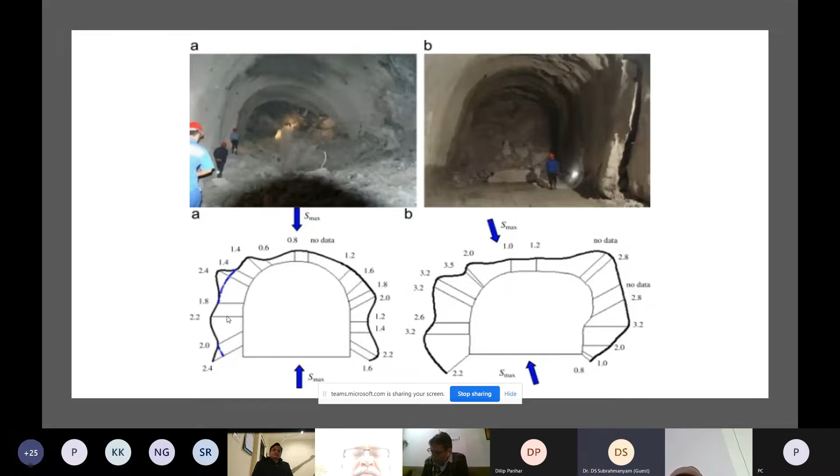So, as Professor Mahendra Singh explained this morning, he gave an idea about the Malpasset Dam disaster. Now everybody knows that after the Malpasset Dam disaster, many people died.

We have done a lot of post-mortem studies. What is the use? Geologists blamed civil engineers, civil engineers blamed geologists. That's all, the blame game started for so many years. But whatever the case may be, it is a crime against humanity, because if you cannot properly design the rock and the caverns, it will be a disaster.

Unfortunately, in India, very little importance is given to research. For any underground mines or coal mines, production is the most important thing. Safety is okay too, but if you suggest something, you should not stop production. Production is most important, and safety is also okay. But if you tell them these parameters are required, first they will ask why it is required, is it necessary, like that.

Recently, I visited the Polavaram project in Rajahmundry last March. CWC had given some guidelines to measure the in-situ stress directions in the navigation tunnel and irrigation tunnel. They called me, I went there and saw the tunnel, everything, and suggested that these formality parameters are most important, since CWC had already instructed them to go for this test.

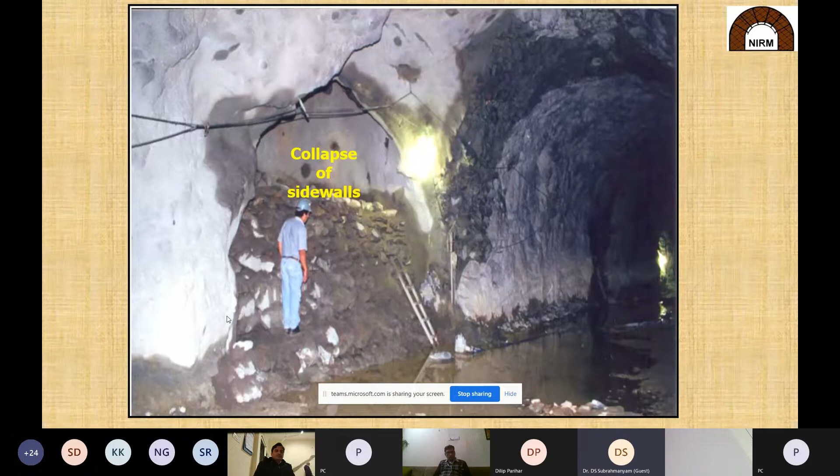So the aftermath of severe rock bursts also happens because of stress only; rock bursts will be formed. Weak rocks under high stresses may lead to squeezing of ground conditions, which may result in damage to the ground support system or require costly re-excavation of the tunnel section.

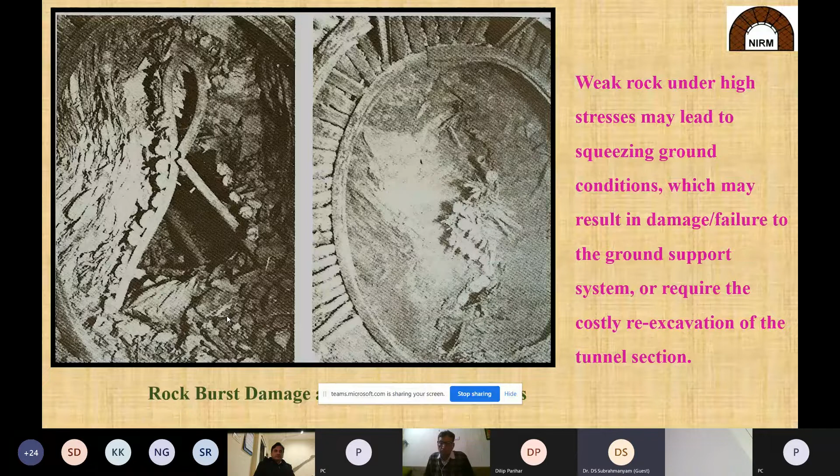This is rock burst damage in the Kolar gold fields. This is a severe roof collapse in mines. This is also not according to the stress orientation.

So the reasons for failure, as I told you, are because we don't have sufficient knowledge about the behavior of the rock. That means we are giving it the least importance. We are studying just 1%, 2% only. The remaining things we are imagining, thinking nothing will happen unless something happens.

Then, not sufficient familiarity with rock mechanics. One should study rock mechanics properly to know how to advise on all these things. So how to do stress measurement techniques? There are indicative methods, field-based methods, and core-based methods.

In indicative methods, borehole breakouts and core disking. In field-based methods, overcoring technique and hydrofracturing technique. In hydrofracturing technique, there is the classical method and HTPF method, and in core-based methods, strain recovery method and Kaiser effect. All these things I will briefly explain because we are lacking time.

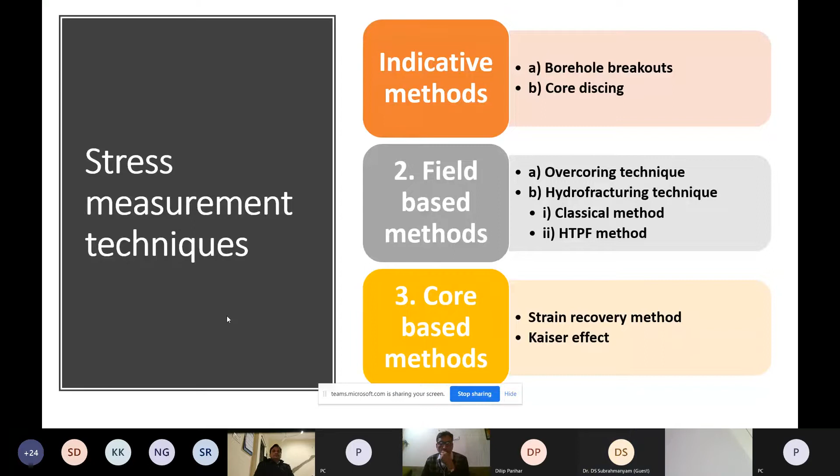So this is the borehole breakout. This is the stress-induced compressive failure. Borehole breakout means stress-induced compressive failure. In deep boreholes and all, extensive field evidence and laboratory experiments show this.

The spalling was observed to occur diametrically opposite, wherever there is a borehole breakout. The direction always shows the minimum principal stress direction only. It is not like the maximum principal stress direction, because the breakout will always form in the direction of the minimum principal stress.

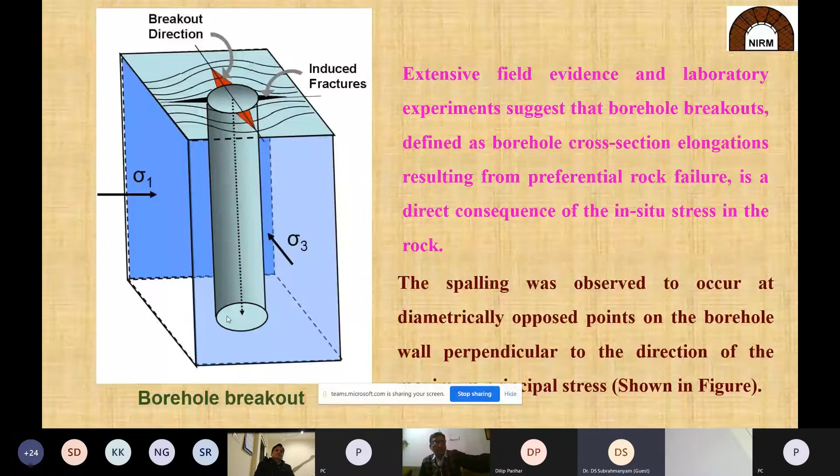So if you find any breakout in any borehole, some calipers are there to measure that, and you can immediately come to know it is towards the minimum principal stress direction. The borehole breakout direction concentrates like that. It is a thumb rule.

And this is the breakout. You see, opposite to the maximum principal stress direction is the minimum principal stress direction, and the breakout always forms in this direction. So this is the breakout, how to measure it and all.

This is naturally formed because some of these things are there. If you see the borehole televiewer, acoustic borehole televiewer, you will find out exactly where some of the borehole breakouts are. You can use calipers to measure it.

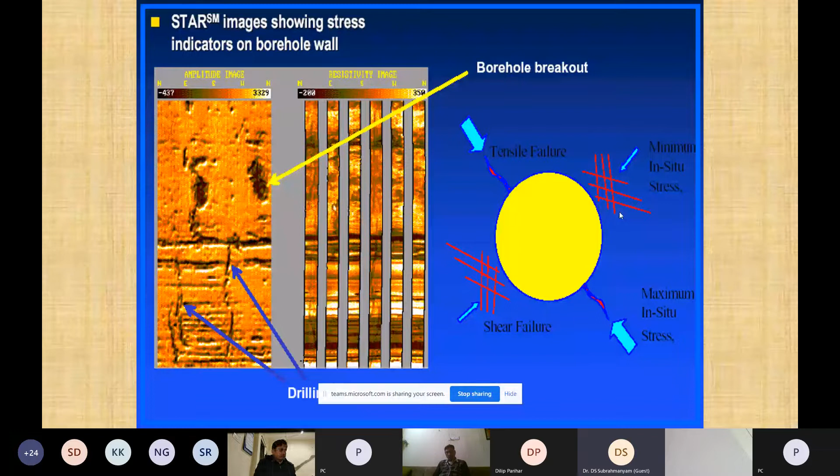There is some indication, but it will only indicate the direction; it won't give you any magnitude. But people are trying to find out what the intensity will be also. For maximum and minimum principal stress direction, borehole breakouts are very much important. You can measure through breakout. So this breakout zone, this thing we can also measure in the laboratory.

So core disking, what is core disking? In brittle rocks, if you observe in many areas in Himalayan regions, we have seen core disking takes place. The thinner the cores, the more the disking, meaning higher the horizontal stress.

Always there is some trough axis; some research is going on regarding this. The trough axis of the saddle-shaped core disks extends aligned with the direction of maximum principal stress. That is the concept; people are newly doing a lot of research on this. Otherwise, wherever you go and see core disking taking place means there is horizontal stress concentrating there. That is the thumb rule.

There's the trough axis, and our saddle-shaped things are always there. That is a very big subject which we don't have time to measure. There's a thumb rule: if you have thinner discs, it means higher horizontal stress, and if the discs are not so thin, it means low horizontal stress, and you can conclude accordingly.

This is the area where, in the Teesta hydroelectric project, we have seen core discing. Even examined by scanning electron microscope, it reveals a set of lineations in the direction of maximum principal stress. So both the saddle shape and lineation markings on the surface of the core disc, observed in scanning electron microscope, unfortunately we don't have that facility. We can find out the maximum principal stress direction also through core discing.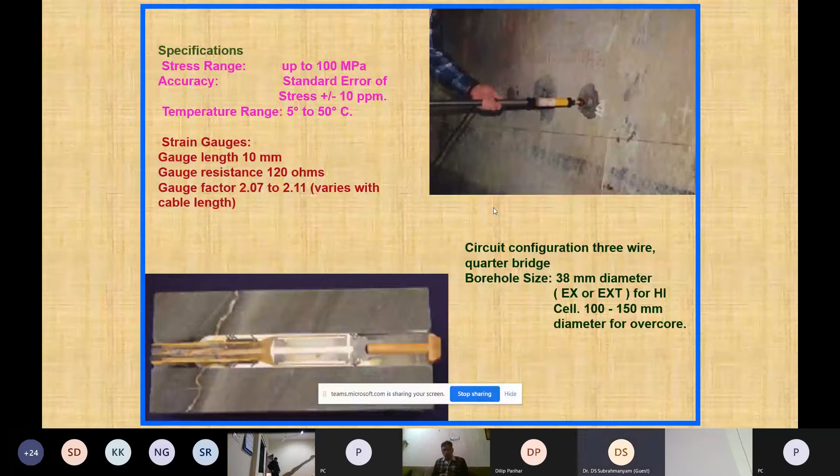Many people in Sweden and Finland still follow the overcoring technique. But the only problem is, if you just make a hole and want to overcore this portion, it won't align with the pilot hole. It will deviate, it will go towards some other area.

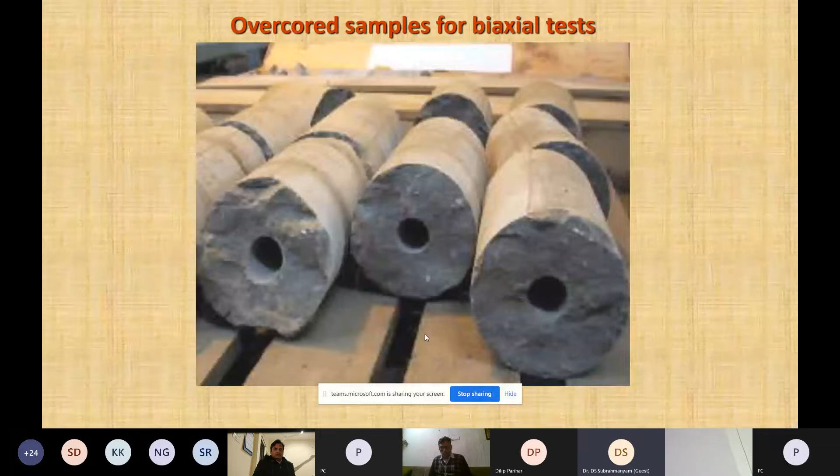So these are overcore samples for biaxial test and all. Outside or inside, wherever you have measured the overcoring, there immediately you have to measure through biaxial test. You have to measure the rock with a USBM gauge or CSIRO hollow inclusion cell, and you can determine the stress. This is also an indirect method, not a direct method.

Now you calculate the strain, and after the strain you measure the stress. The overcoring method will give all three parameters: vertical stress, maximum principal stress, and minimum principal stress. I already told you vertical stress is normally calculated, but in the overcoring method, vertical stress will be directly measured, meaning it is three-dimensional. Overcoring is always preferable, but it has some disadvantages because of the glue and all, it properly should be placed, and the pilot hole and the overcoring should be aligned properly, otherwise it will give wrong results.

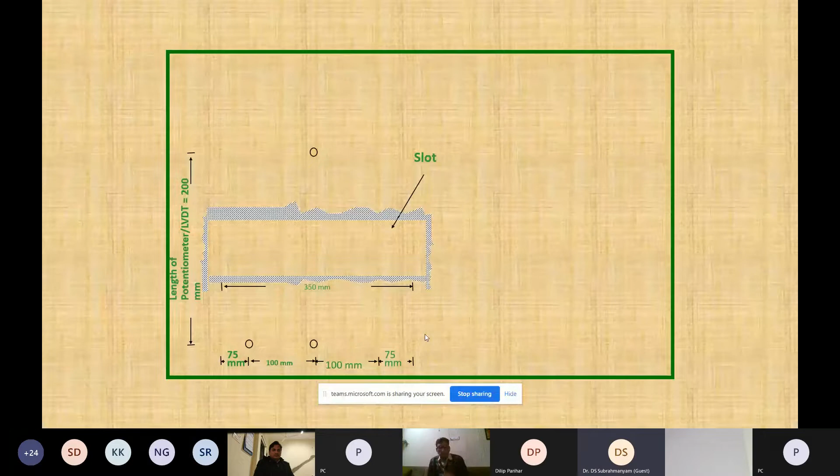So, flat jack method - many people know the flat jacks and all. There will be jacks, material made of metal plates, and one hole to keep sufficient hydraulic oil inside. We have to prepare the slot wherever you want to measure, insert 2 pins, and afterwards, after 1 or 2 days, insert the plate inside the flat jack, of 400 millimeters by 350 millimeters.

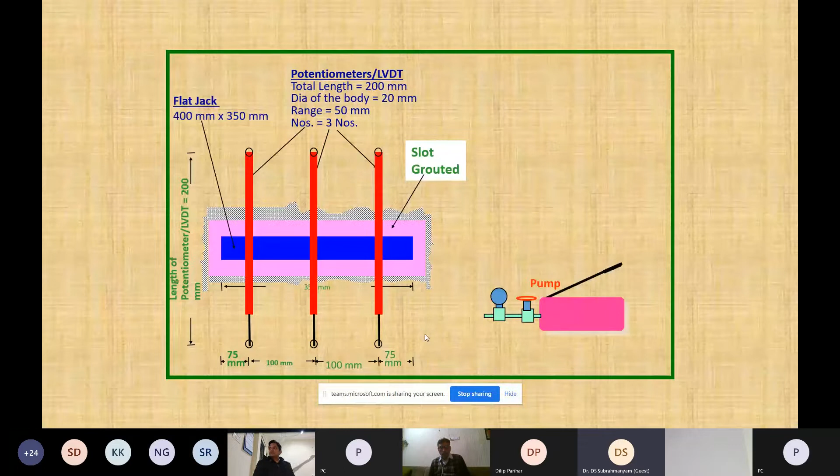And again, you have to grout. After grouting is done, you keep potentiometers and LVDT and measure the distance, and again you have to pump. If it pumps back to the original shape of the slot, the two portions will automatically show the strain you can observe.

Through the data acquisition system, once the slot is grouted, it will retain its own position, meaning you can measure the strains. In that way, you can measure the stress, but it gives only induced stress, not in situ stress, because you are measuring on the wall of the rock only, just 20 or 30 centimeters depth. It gives induced stress only, so this is also not useful for any design purpose.

HTPF method means hydraulic testing on pre-existing fractures. In the classical stress determination, hydrofracturing test is generally based on some assumptions: the pressurization occurs sufficiently fast to avoid the fracturing fluid, and the rock is homogeneous. The fracture initiates and propagates in a plane perpendicular to the least principal stress. That means after creating the fracture through the hydrofracturing method, the fracture will always be created in the direction of maximum principal stress, that is perpendicular to the least principal stress direction only.

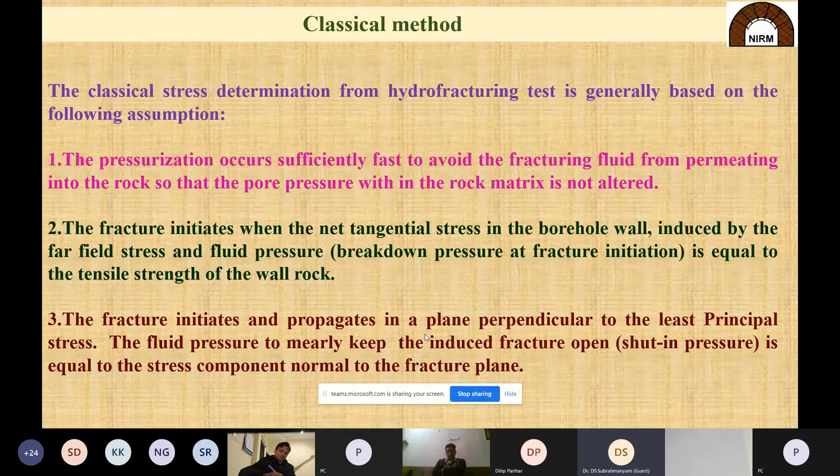All these things relate to breakdown pressure. If it is a new fracture, you have to just create the fracture, or in the HTPF method, if you want to create the fracture you can, or you can reopen already existing fractures. That is the main advantage. Using software, you can even reopen existing fractures without creating new ones, and it still gives the stress. So this has only been utilized by Hubbert and Willis, who initiated this fracture mechanics, also proposed by Rummel.

So this is the hydrofracture, how the fracture is created. This is the borehole, NX size or EX size borehole, drilled in the vertical, horizontal, or inclined direction. I will explain and show you the equipment, how the fracture is created along the major principal stress direction. The plane of the created fracture looks like this, as shown here.

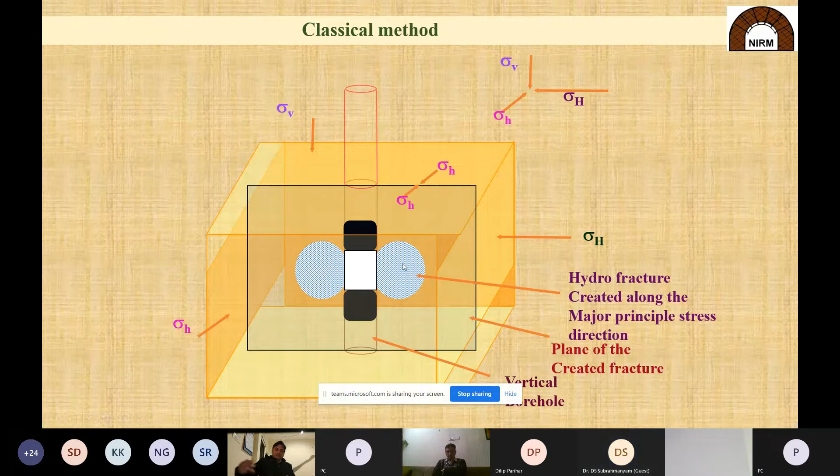This HTPF method was coined by Cornet and Valette in 1984. This is three-dimensional, but the only thing is, if you want to measure by the HTPF method, you have to select zones wherever the rock is fractured, and you have to increase the zones.

Suppose a 30 meter borehole, NX size or EX size, is there. You have to create different zones - at 5 meters depth you have to do three measurements, and at 10 meters, 15 meters, 20 meters, 25 meters, like that. Maximum zones means you can get maximum fractures. The standard deviation of all these fractures, their dip and strike, we can measure, and afterward, whether you create new fractures or use old ones, with the HTPF method we can measure the stress direction and magnitude.

So this is the theory.

Now this is the equipment we are having, imported from Australia, the inflatable packers. I was trained under Professor Rummel when he was conducting stress measurements in KGF long back in '95, '96, so we have imported equipment from Rummel also. I have even given a lecture in front of Cornet, who invented the HTPF method, in Finland in 2013, and they were surprised by the innovations we have done that they have not done. This is because of some practical problems we encountered while doing this type of fracture testing for stress measurements, and we have indigenously developed some items to encounter all these issues.

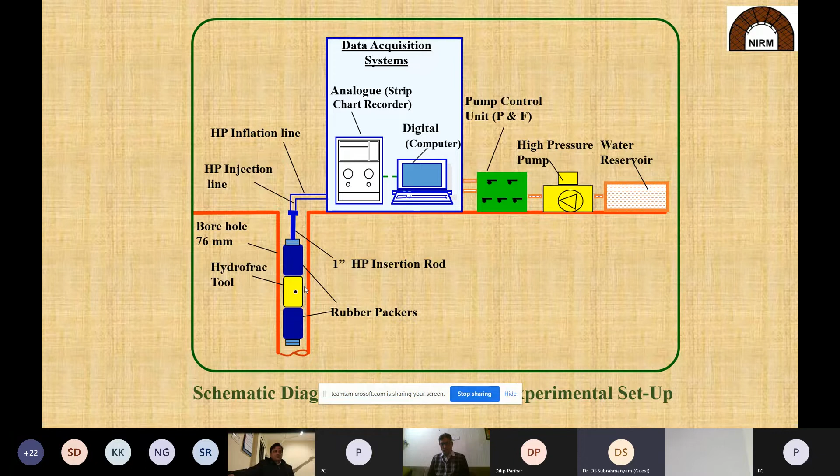That impression will give the fracture direction, dip direction, and all these things, shut-in and everything. So with the software we are having, we'll see how the fracture has been created, in which direction it is propagating, and find out the orientation and magnitude of the stress in that particular area.

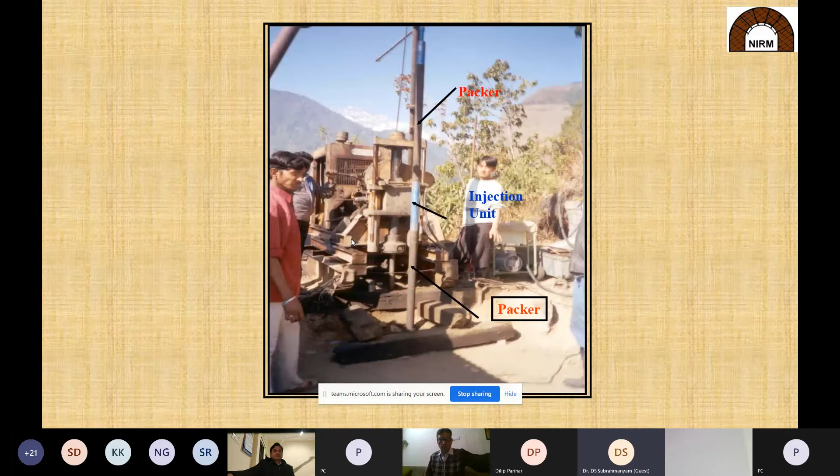This is the packer, and this is the impression packer. So you see the impressions are like this - whatever fractures we have created, we have taken the impression. The impressions will be like this, and we are having software to address the fracture.

Nowadays in deeper boreholes, after creating the fracture, it's very difficult to keep the impression packer and measure and take the impression, because at 600 meters, inserting the packer will take 2 days. So after creating the fracture, you have to remove it and keep the impression packer again, which will take 5 days. Then you may not catch the impressions at all. It is very difficult.

So now we have also taken the acoustic borehole televiewer. First you pre-scan the borehole completely - whatever natural fractures are there, you can delineate and get a clear picture. Afterwards, once you create the fracture with the hydrofracturing system, you run the scan again, and with the BHTV, wherever you have created the fracture, automatically it will give a fracture impression and everything. This is the easiest method we are following in deeper boreholes.

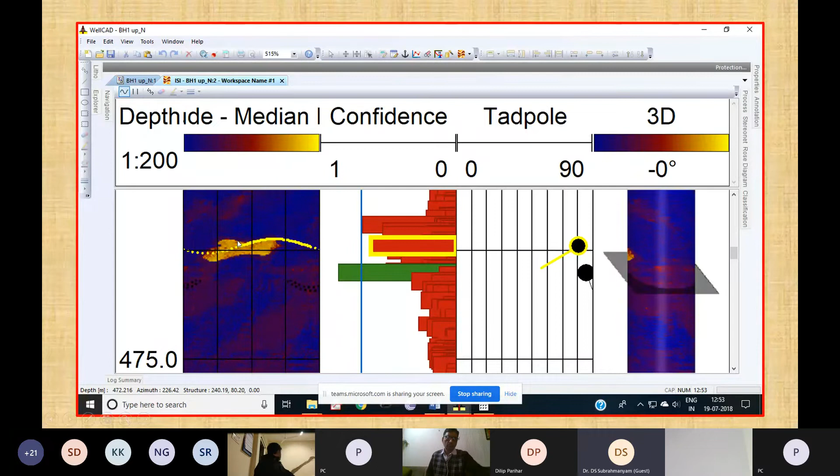These are the images where we have created the fracture. It will completely give the data - the strike, dip direction, and everything, it will give the azimuth.

So we have to carefully insert it in the borehole. Sometimes something happens automatically and it won't come out. After inflating and creating the fracture, it won't come out. There will be a buoyancy effect and all - we have to carefully see. It is a very difficult task.

So we have conducted this at 600 meters depth in the Singareni collieries. This is the first time in India with our technology.

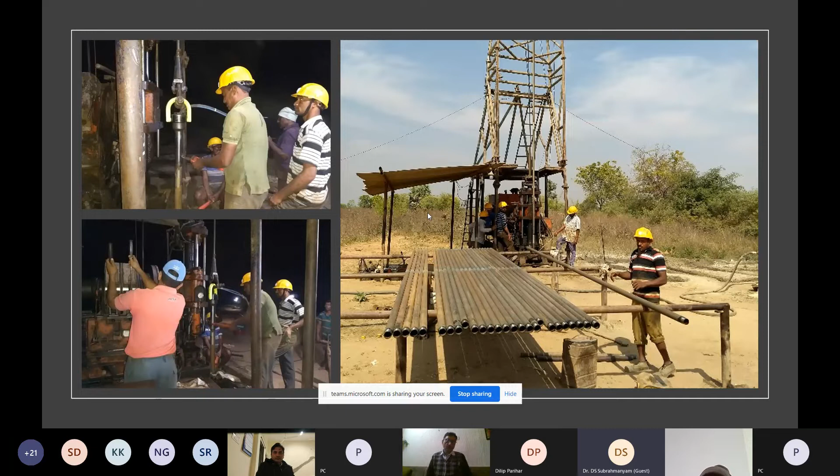Of course, we have imported the equipment, but completely based on our technology and knowledge, we have measured the stress. Now we are going up to 1000 meters also in some other areas. So these are some of the pictures.

So core-based method, strain recovery method, and acoustic emission method. Suppose a rock is there, the stress should exceed the already applied stress. If you apply more than the already applied stress, emissions will occur and will be observed. That is called acoustic emissions, through which it is called the Kaiser effect. Through acoustic emissions, you can find out the magnitude of the stress.

Kaiser is a phenomenon observed in geology that describes a pattern of acoustic emission through repeated cycles of mechanical stress, and the absence of acoustic emission or seismic events until that load is exceeded. That means the rock won't recognize a lesser stress - of course it is a dumb creature, it can't speak, but it will remember what stress was already applied on it. If you exceed the already applied stress, it will forget the old stress and remember the new one. That, roughly and crudely, is called the Kaiser effect. Through the Kaiser effect, you can measure the magnitude of the stress.

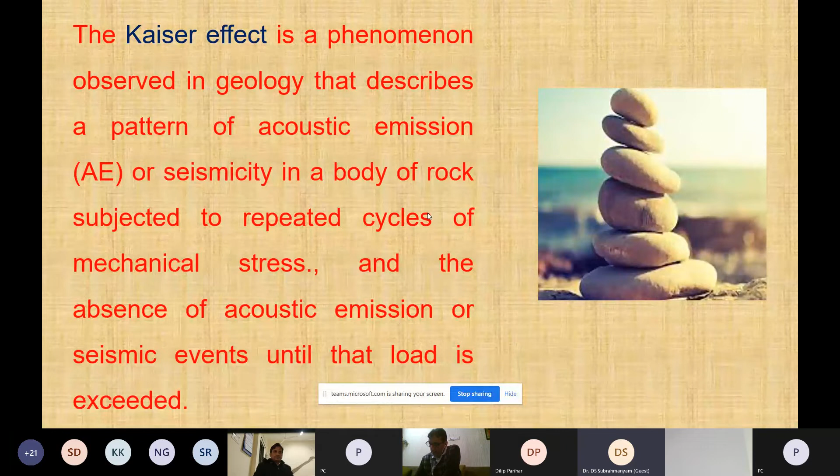So ultimately, the conclusion and thumb rules I already told - we have opportunities to see economically how to go about rock behavior, how it is changing, how stress is changing. If we don't study the behavior of the rock mass, we face maximum risk, and the maximum principal stress direction is always a very important and key factor.

One example I will tell you is in Gujarat, the Machu Dam - if I correctly remember, in 1979, this was a similar disaster like the Malpasset Dam and Vajont Dam in Italy. Ultimately, they studied for 2, 3, 4 years and wrote the report, which is on Wikipedia. You can see the Machu Dam report - if you open it, it will show it as an act of God, or you blame the rock. But both can't speak - even God can't speak, and the rock also can't speak. It shows the peak of human arrogance.

So we should avoid that, and we have to handle the rock properly. The rock will respond to you properly. Unless you handle it properly, the rock will show its true colors, and one day it will become a disaster.

So my advice is always, irrespective of the cost and all, one should go for a data bank. One should have the data bank for stress measurements, deformity measurements, and shear strength parameters - shear stress, angle of internal friction, and cohesion - wherever the dam is constructed. All these parameters are very important.

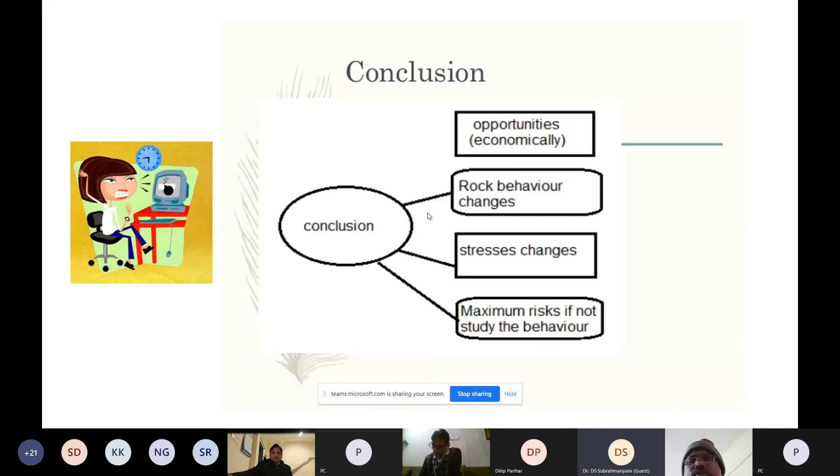We are having all these facilities at NIRM. In-situ stress by hydraulic fracturing method and overcoring method. In-situ deformity we can measure by plate load method, plate jacking method or Goodman jack method, and dilatometer method. In-situ shear we can measure by direct shear method, and safe bearing capacity and modulus of subgrade reaction of soil or rock by plate load test, foot load test, and standard penetration test. We are also having an acoustic borehole televiewer. All these facilities we have at NIRM.